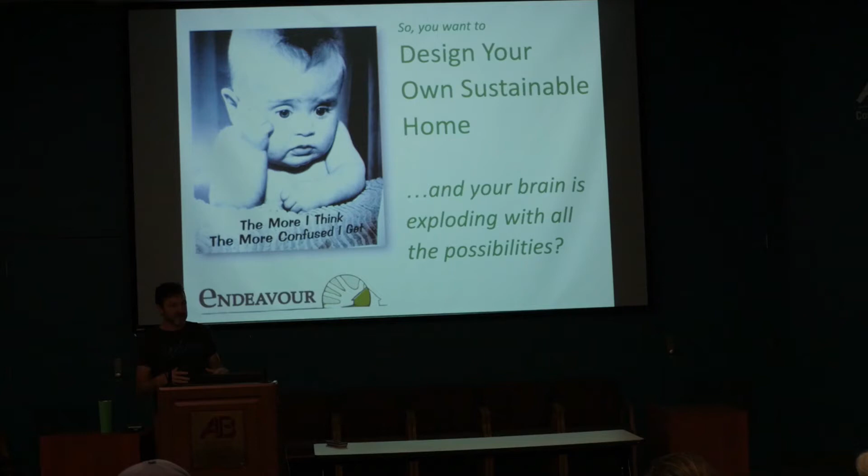This presentation is from Endeavour. We actually do it as a 2-day workshop with a fairly small group, so this is kind of the intro part of it. I'm very used to doing this with a group around a table, not so much as a lecture style thing. But I'm very happy if you have questions as I'm going through—don't hesitate to put your hand up. There's ample discussion time built in, so don't feel like you have to sit on your hands and hold your questions till the end. There's a lot of content here, and if you wait till the end, you might forget things you had to ask earlier on.

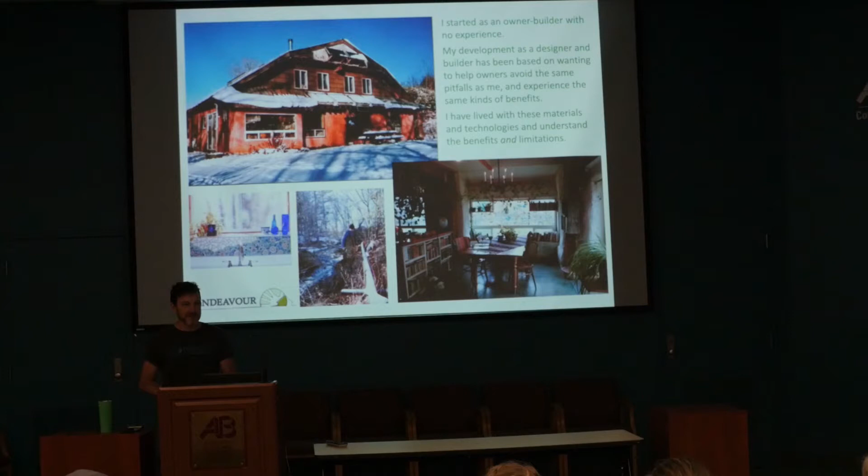I just want to very quickly frame how it is I'm here and what I've been doing. This workshop is really the workshop I wish I'd had when I built my first house, on which I made every mistake that's possible to make—I think I invented other categories of mistakes and then made them too. Since that building I've become a full-time designer, builder, and teacher. The hard lessons learned on that house were a good start, but I'd also love for people to not make those mistakes and probably make other ones, new ones.

Since that first house, which was 25 years ago now, I've been really fortunate to have a pretty exciting career. It's been a fascinating time to be involved in this big umbrella world of sustainable building. I've had a chance to work with a lot of really wonderful people, materials, and systems, and lots of clients who've been open to trying things out and trusting in me and the team of people I work with to do some really interesting and pretty fascinating projects.

I call myself a sustainable building omnivore. I'm not at all attached to or dogmatic about any particular material, system, or approach. My whole approach is very much that we try to design the right building for the right place, using the right materials for that person at that time, and that's rarely a cookie cutter kind of thing. There's often so many ways you could approach a particular building, and through that, at Endeavour we've managed to somewhat systematize not what we build, but how we get to the point where we're ready to build that.

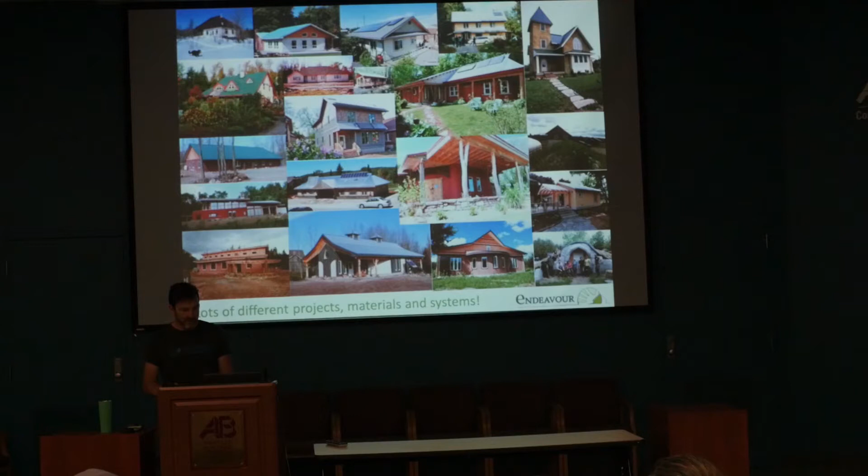Like a lot of people, my move into thinking about alternatives—wanting to at first just build myself a house, but then do it for other people—came from the fact that I didn't like what I saw particularly in the conventional construction world, but I also didn't know what it was about that I didn't like. I kind of just didn't like it, and thought that there were probably ways to do something better.

Because I work with a lot of professionals on both the design and building side who make their living doing conventional construction, I realized I wasn't dealing with an evil conspiracy of terrible people determined to do bad things to the planet and to people in buildings. What I realized is that this is a really smart group of dedicated people who have set out to achieve certain goals with the buildings they're building, and that just some of my goals weren't reflected in their list of priorities. The priorities of the mainstream building world are to meet minimum code standards at the very least, and to put things out at a cost that the market will bear.

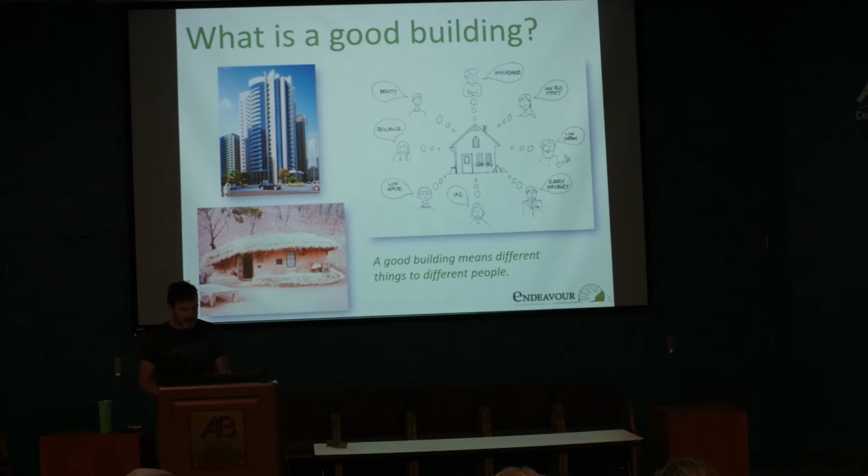But really as a designer, that's what I'm asking my client. I'm asking them, what is it that you actually want? And it can't be so general that I can't act on it. So I need to know what it is that they really, really want.

And so in asking that question to a lot of people over a lot of time, and in thinking about the answers we get, we've been able to lump together categories of concern that people have. So when they come to us and they want something, whether they call it green or natural or sustainable or whatever adjective is describing it, what we realize is that underneath the surface there are a bunch of considerations, and not everybody's concerned with all of them, but we now like to put all of these things on the table and have people think about it and react to it, and then tell us how they feel about each of these.

So they're in no particular order, not in any order of importance, but these are sort of, I think there's 10 or 11 categories of criteria that we see as being individual pieces of a sustainable building. So this first one is ecosystem impacts, and this was a big motivator for me in my first project, and continues to be.

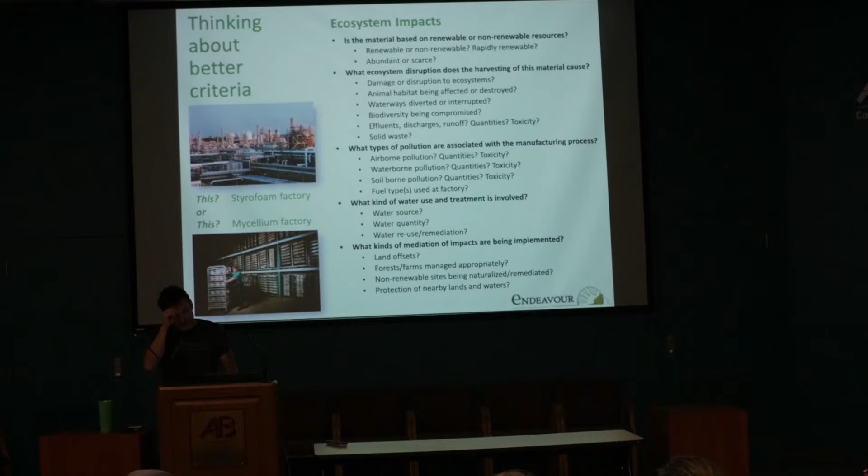The other picture is of a mycelium factory in New York State, where they literally grow an insulation. They take a bunch of chopped up agricultural waste, put in the spores they've developed, and grow an insulation. These two products have the same R value and a lot of the same properties, yet one has basically no ecosystem impacts, and the other has a lot. So if this category of ecosystem impacts is important to you, you'd want to be making choices along those lines.

Somewhat tied to that, and for the people who were here earlier this morning this is a bit of a repeat, another criteria that is really first and foremost on my mind these days is the embodied carbon, which comes from the process of harvesting and manufacturing materials. There are all kinds of emissions associated with that work, and some materials will have a really big carbon footprint in the material itself, while others will have a lot less.

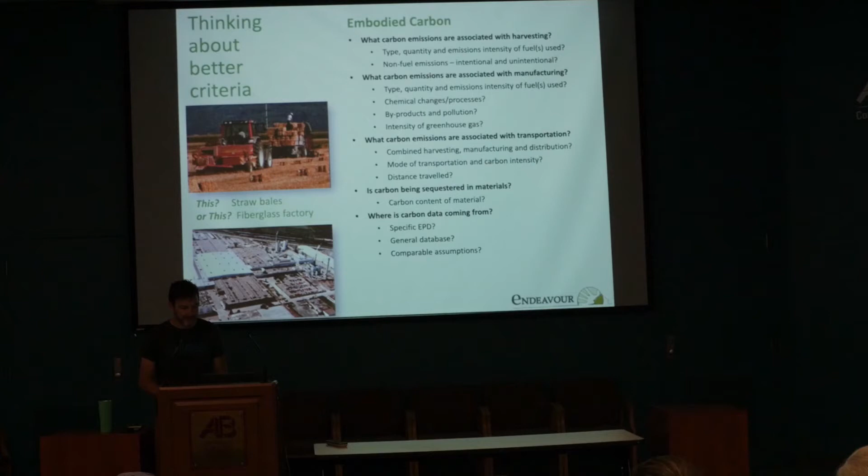So a similar sort of list of questions: wanting to know the actual quantities of emissions, where they come from, what fuels are causing them, whether some emissions might be from chemical releases during the process, other emissions from byproducts or side effects of the process, and also emissions from moving the materials around. The further you transport things, the more emissions are associated.

On the flip side, some materials actually store a bunch of carbon. Plant-based materials are carbon storing. And very important to this is how you are determining those emissions, and how you're getting your figures for where that comes from.

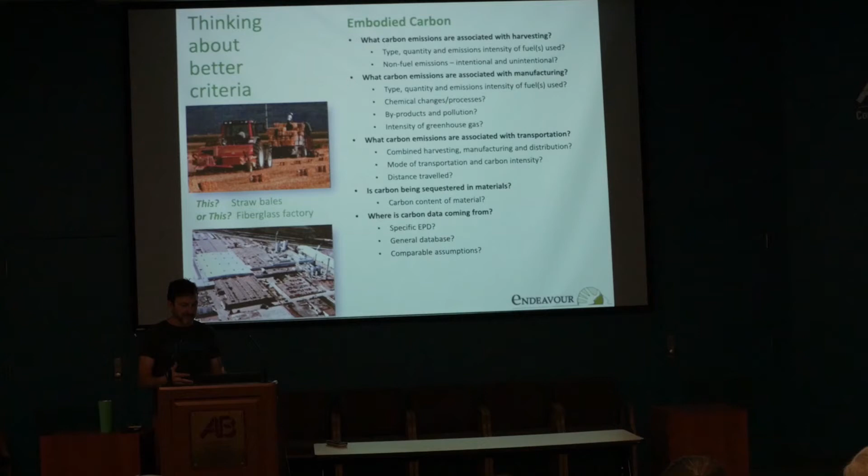So again, a comparative exercise. I do a lot of work with straw bales, and the embodied carbon of making a straw bale is really low—basically just the fuel it takes to drive the tractor around the field and bundle up the straw. Compare that to a fiberglass factory, where they have to burn enough fuel to heat the glass till it's molten so they can spin it like cotton candy into fibers. So again, two materials with very similar performance in the building will have really radically different carbon footprints.

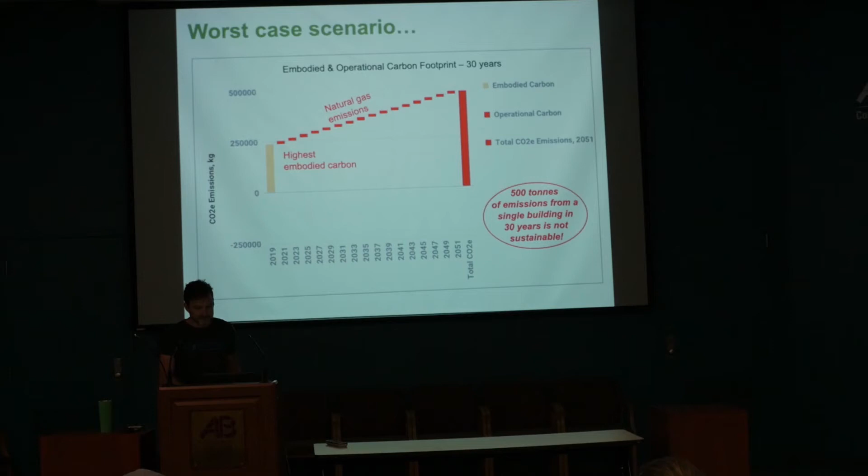I think I'll skip that, because we'll talk about energy efficiency. I might come back to you, Chris—you have another question?

Oh yeah, sorry. If you live in an area that has high rainfall, when you're building, do you lean more towards materials that would go up more quickly, and then you can increase it, or does it really matter?

It wouldn't. All of these criteria we're going to go through would rank higher to me than how much it rains in that particular area as a reason for choosing a particular material or approach, because there would be ways to use all kinds. We already use all kinds of materials in conventional building that can't get rained on, like fiberglass insulation—it doesn't work when it's wet either. So you build to ensure that doesn't happen.

So I wouldn't say choose foam insulation just because it can get wet, if it didn't match all my other criteria. I would say, here's the things I want to meet, then how do I build to make that possible—so that wouldn't be a main guiding principle.

Energy efficiency is something I've spent my whole career thinking a lot about and trying to make really energy efficient buildings. In some ways this is a great criterion to deal with, because it's easy to put numbers to, and easy to figure out how you're doing. With energy efficiency you can actually set a numerical target for a building.

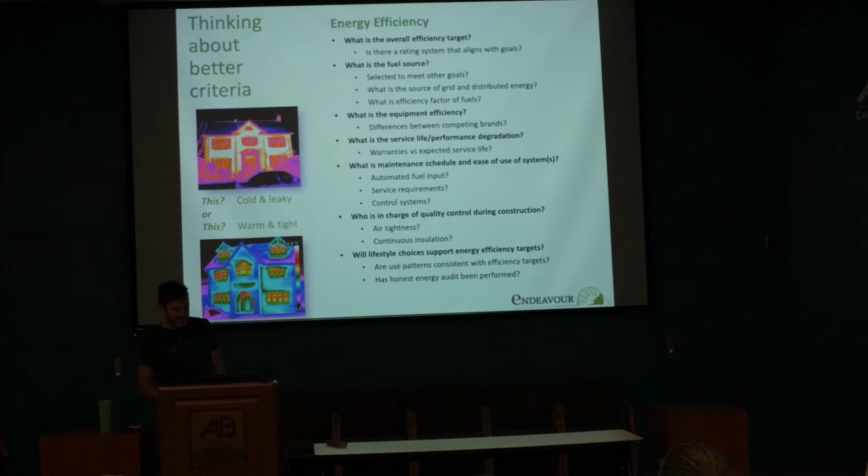So is that an energy efficient building? Well, we made a box that is, but in the end, that owner's lifestyle just didn't match that. So that's an important consideration too.

So for us to think about meeting these energy efficiency targets, we do a lot of energy modeling on our projects, and I really think this is something I'd encourage everybody to think about and engage with as you do this.

We use the Passive House modeling software, the PHPP package, but we very rarely build Passive House certified buildings. I just think the software is really good. It seems extremely accurate and really lets us fine-tune a building. That fine-tuning is what really happens during this energy modeling, which allows us to take an energy efficiency target and figure out the most cost-effective way to get there.

There's lots of rules of thumb, like you just put in really good windows, or double the insulation in the attic, things you think will give you a certain result. But the nice thing about a good energy model is that it actually gives you the result, and you can play with that. You can say, what's the difference if I move from double pane to triple pane windows? From the model I can see the improved performance, and ask does that improvement justify the cost, or would we be better off increasing attic insulation, improving the foundation, or improving our passive solar aspect? We can play with the data until we've met the energy target in the most practical and affordable way.

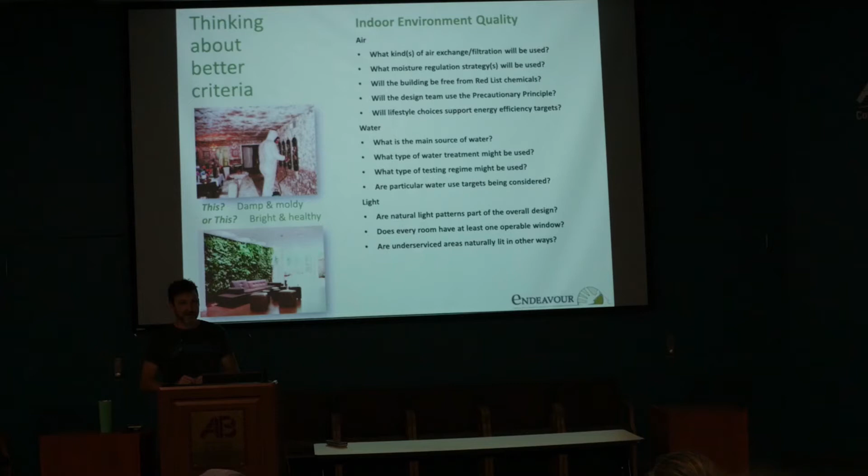In Canada, there are only two things I can't legally put in a building: lead and asbestos. That's it. There are no further regulations anywhere in our codes, I could offer arsenic countertops.

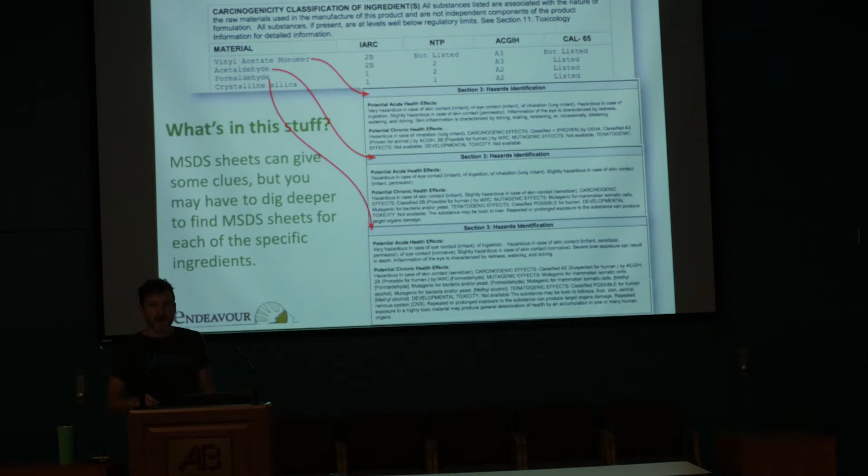Another interesting thing from the EPA: every two years they put out a list of the top 20 environmental things that cause harm to humans. Smoking is always number one or two, and there's a bunch of things. Being inside a building has never been less than number 5 on the EPA's list of environmental harms to Americans. That tells you something about the stuff that's in all the things we surround ourselves with, that just being in a building makes the top 5 environmental problems for humans according to the EPA.

Okay, so waste is a category that not a lot of people go into a building project thinking, oh, I really want to make sure this is a low waste project, but it's incredible how much you can vary the amount of waste by making choices up front.

So a typical North American 2,000 square foot home sends 8,000 pounds to the landfill - that's how much comes off the construction site. We did a house in 2017 where we sent 18 pounds to landfill. So there's a range there, but the 18 pounds comes from thinking about this as a criteria and choosing things right from the get-go that we know aren't going to generate a lot of waste.

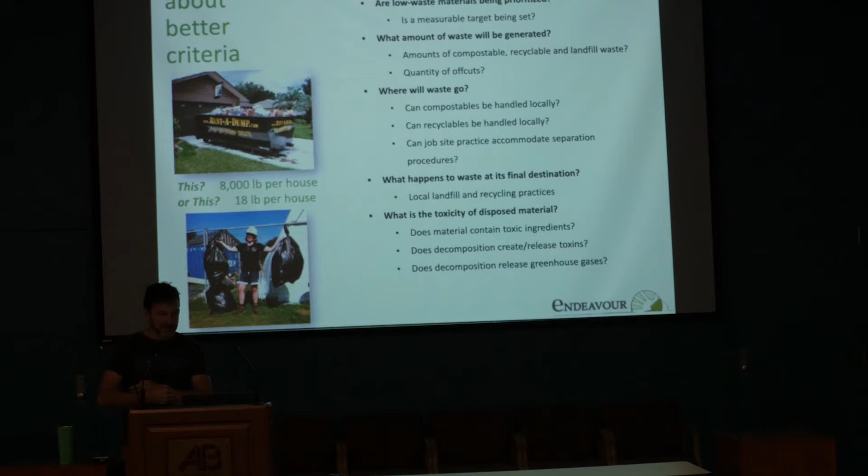The first step in that is setting targets, and some of the building rating systems like LEED and the Living Building Challenge have 50% reductions, 80% reductions, whatever. You can choose some targets for waste reduction.

Then thinking a lot about where does all this stuff go? Some of it is just a matter of sorting. A lot of that 8,000 pounds of landfill could have gone other places, but the typical thing on a job site is to have one bin and everything goes in that bin. Whereas if the cardboard had come out and gone to recycling, and the metals had gone to recycling, and the drywall had gone to recycling, they might have had much less waste.

So kind of knowing the materials you're buying - are they compostable? Are they recyclable? Do they go to landfill? If they're recyclable, is anybody actually recycling them? Because that happens quite often - you buy a product that in theory can be recycled, but you've got it on your site and you realize, oh yeah, nobody's going to take this, so I am going to send it to landfill.

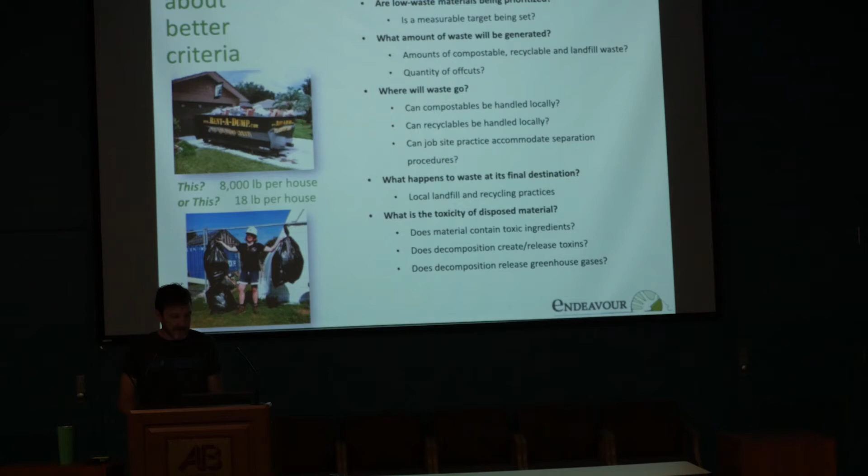So yeah, a whole bunch of things that you can think about in terms of waste. And a lot of that waste then becomes greenhouse gas emissions from landfills, so there's a climate piece to trying to reduce that as well.

Resilience is a category that we didn't really have on our criteria list. I think we started adding it about 5 years ago, and we realized that people were actually starting to really think about this, with extreme weather events happening more frequently.

So we kind of ask clients, like, if you're thinking about resilience, what do you mean by that? Are you looking to be able to be comfortable through a 24-hour power outage? Are you looking to be comfortable if things get disrupted for a week, a month, a year? Are you thinking about the zombie apocalypse? Do you want this to be a forever kind of resilience? Obviously, the design responses to those would be quite different.

But knowing what the client wants is the first step, and then assessing what the risks are where that building is being built. Is it floods? Is it storms? How far away is it? Heavy snowfalls? What are the potential threats? What kinds of disruptions could happen, around say fires, and how close are you to a fire service or a fire station? Those kinds of things.

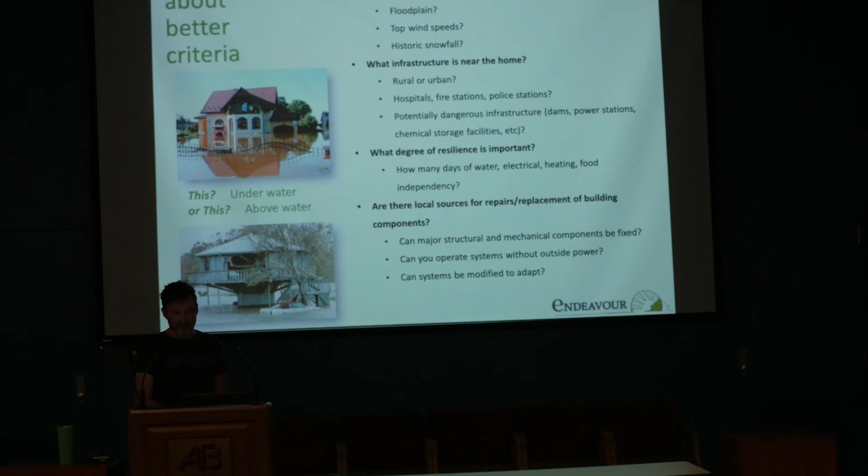For us to think about resilience also means to think about can this building be repaired or maintained or made functional again with locally obtainable resources. It's great to have a high efficiency German air exchange system with a heat pump built into it, but after the hurricane, there aren't very many service people for high performance German heat pumps, so that thing that was great in this condition is now basically useless in that one. So if somebody's really thinking about resilience, it's also are these systems and materials that can be made to keep working if conditions are bad.

The Resilient Design Institute has a really great website for information for resilience-related things. But these are sort of their guiding principles, and at the very least, even if the client isn't saying this is a big driver for them, these are things that I think are important, and we would try to think about anytime we're building anything.

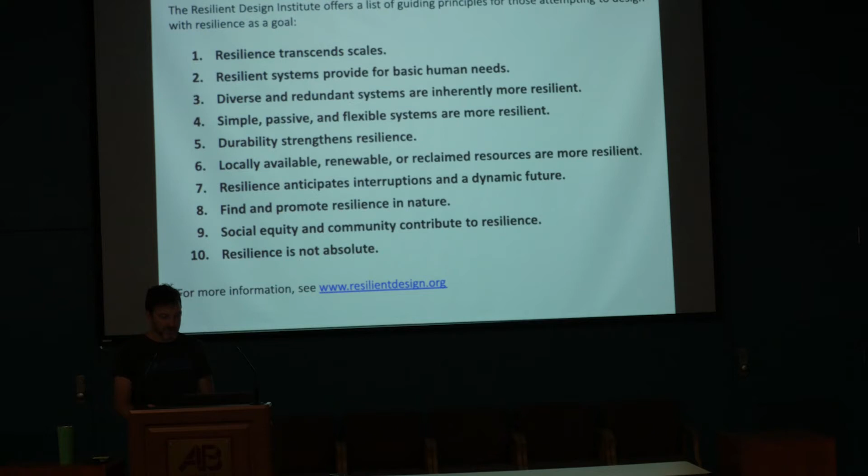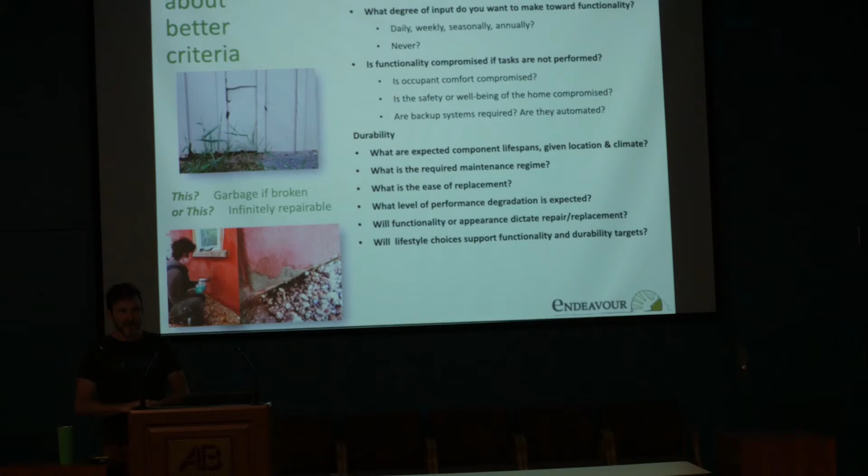Maintenance and durability is another criteria that we spend quite a bit of time trying to tease out what a particular client sees in these categories. They're kind of different in my mind. By maintenance, I'm talking about the things that need to happen to the building to keep it functional, and durability would be the expected lifespan of the materials and systems that are going in.

So, an example would be the difference between, say, a wood stove and a gas furnace. Both of them will heat a house. A wood stove requires somebody to light that fire, maintain that fire, and clean out that firebox on at least a daily basis, actually several times a day, to keep the fire going, versus a gas furnace where the thermostat clicks it on, the thermostat clicks it off, the gas arrives, and the homeowner has nothing to do with it.

And I think there are lots of ways to make really good, low impact and high performance systems that if the owner is willing to be involved, you can lower the costs of those things. And if the owner doesn't want any involvement, then often the cost will go up.

An example being ventilation. You can have an automatic ventilation system that is reading the moisture content of the air or the CO2 content of the air and turning itself on and off and keeping really good indoor air quality. Or you have windows that open and close. But if the owner is not going and opening and closing those windows, then the CO2 is staying in the building and the moisture is staying in the building. So while the windows could be doing the job, the owner has to make sure that they actually do the job.

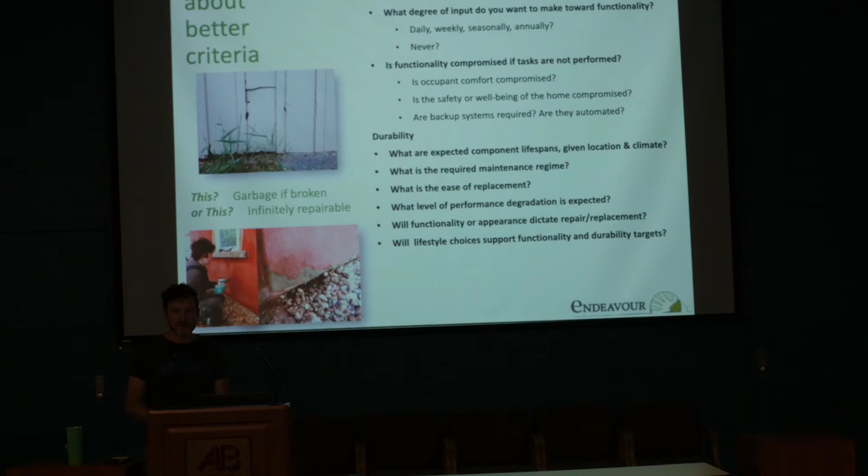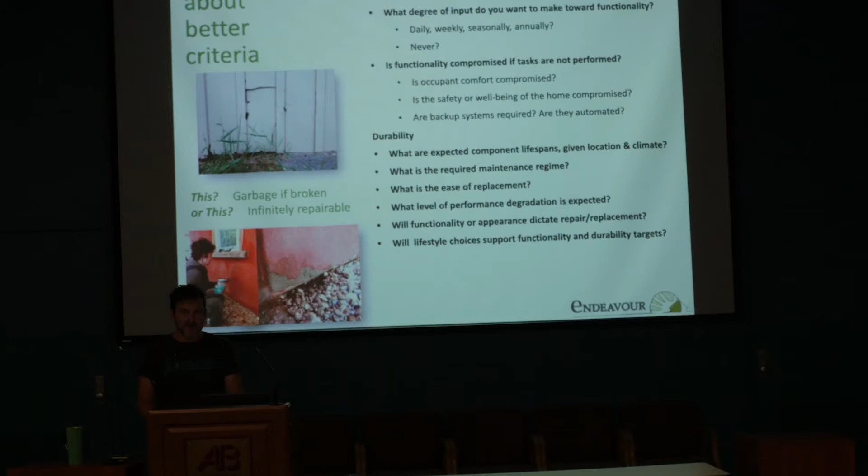One of the examples I like to use to illustrate different approaches to this is vinyl siding in one photo, and clay plaster in the other. In terms of durability, most people would think vinyl siding is more durable, and it's kind of true up until the point. Vinyl siding is one of those things that's durable until it's not. In this case, somebody backed into it, but at some point it just weakens and fails. The clay plaster, people think, especially where I live, it's cold, it's snowy, it's rainy, it's all these things. Oh, clay plaster, that's not a very durable choice. Well, I did my mom's house 15 years ago, and after 15 years, you can see that the little corner had eroded a little bit.

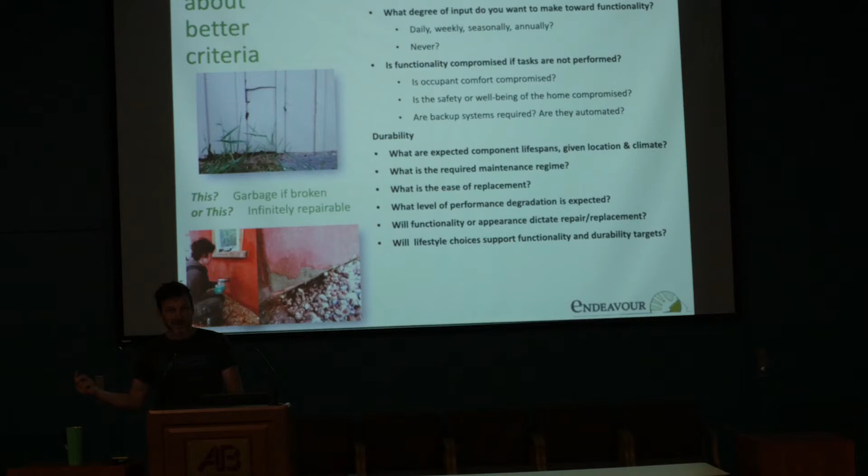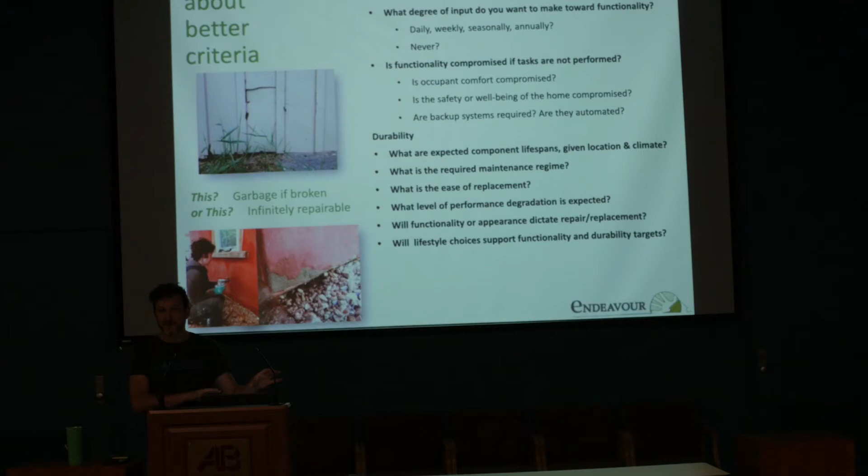So I took some of the same clay that we used the first time, and I wet it, and I wet the wall, and I put the clay back on the wall, and now it looks brand new again. That took maintenance, but it's incredibly durable. We could keep doing that for the next 200 years, 300 years. The vinyl siding is durable, and then it's garbage. I'm not making a value judgment in that - that's up for an owner to decide. There are different approaches, and which is the approach you'd like to take to durability.

Cost is always a criteria. Even though I've been doing this for a long time, I have yet to have the client for whom price was no factor at all. So it's always a pretty major driver in all of these considerations.

Because we're often working with lots of different approaches to buildings, our approach to cost is really to think about value rather than the actual dollars. Not meaning that the dollars don't matter, but a lot of it just has to do with size and thinking appropriately for your budget.

Most people could afford expensive materials if the building was smaller. So if through all of these other criteria you've come up with a building that per square foot is more than you were thinking of spending, if you make less building, you can afford that building. So just making sure right off the bat that the building size and the budget match.

Our clients are clear on what are actually their needs versus what are the things that they say they need but really they just want. Not that it's bad to have wants, but to categorize them as wants and to be able to even rank them so that you can lose some of the less needy wants and keep the ones that are really important.

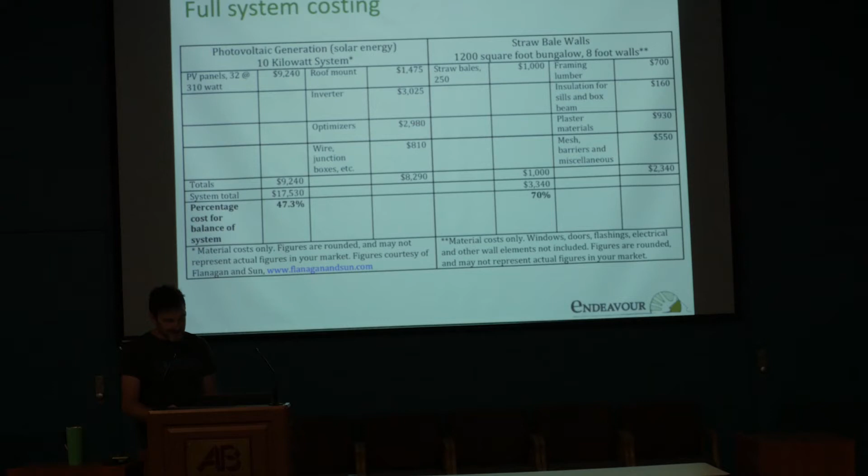And with straw bale walls, same thing. Clients will be like, oh, I only need this many bales, it's this much a bale, my walls are going to cost me this much. But they forgot that there's framing and some other insulation, and that they're going to have to plaster them, and that the plaster requires some mesh and other things, and suddenly they've almost tripled the cost of doing that.

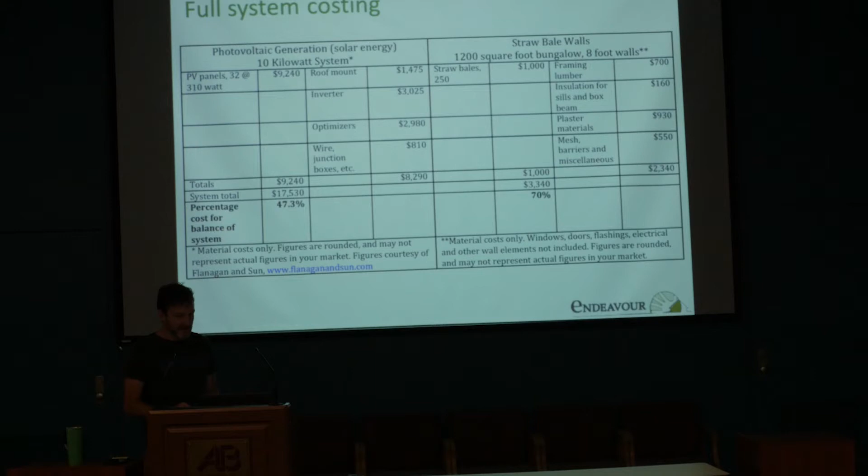So just as a warning to not get yourself into a project without roughing out budgets.

And the labor side of that is sort of like the twin of the cost side, because obviously, for the most part, labor will also have costs associated with it. But also, who's doing the labor is a big question, and that actually will direct a lot of our material and systems choices. If this is an owner trying to do everything by themselves and they're not particularly experienced, that really changes our approach to the design versus if everything's being hired out with really good professionals, different choices will get made because of that.

So who's doing the labor? How is the labor being broken down? Are certain pieces being done by professionals and others being done by the homeowner? Is there good expertise locally?

Balancing labor and material costs. It's not across the board true, but in general, lower cost materials often require more labor, and higher cost materials require less labor.

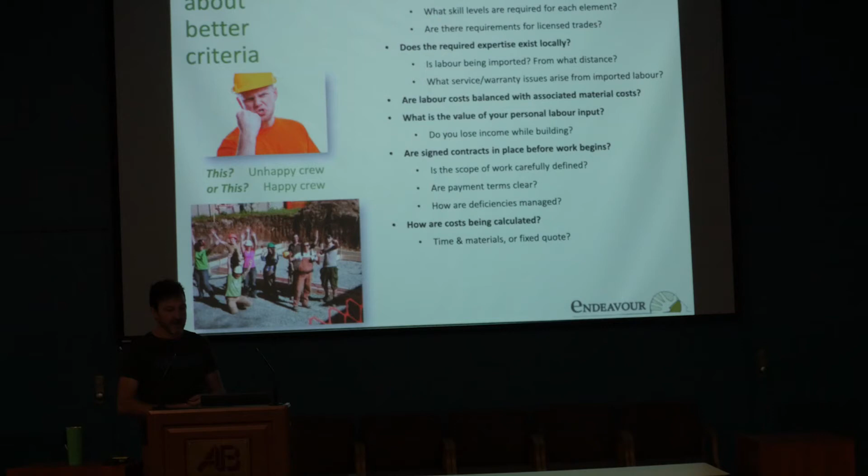If this all falls apart really quickly, if the people you've hired don't care about these things too—guaranteed the plumber, the electrician, the framer, and all those people are going to start whipping out the bottle of PL400 glue and all these other products, even though you're trying to have a non-toxic building. If you've told them that and they don't care, then everything you're aiming for is going to get undermined. So thinking really carefully about who the people are, I think, is really key.

And then, how does all this fit together with the building code, and what degree of code compliance you're wanting to work within is also really important. I don't know how different the codes are between home and here, but here we have basically a prescriptive code. So this great big fat book that's full of do this, do this, do this. And those prescriptions in our code are called the accepted solutions. Those are the things that the code says: if you do this, we're going to give you a permit and approve your work on site.

And then there are things that would fall under the alternative solutions side of the code, which for us means we have to show the building department that what we're suggesting, because it's not a prescription, is the equivalent of the prescriptions, that it meets the minimum requirements, and you have to show them in a way that makes them comfortable to say that it is an equivalent.

So how we approach a building, we've done buildings where pretty much every part has been in alternative compliance, and we've done buildings where it's all accepted solutions, and sometimes it's a mix. It'll be almost all accepted solutions except maybe a wall system or a ventilation system, one component might be alternative solutions. Thinking about the number of alternatives you're putting forward, and how that will go with your code department, is also a really important consideration.

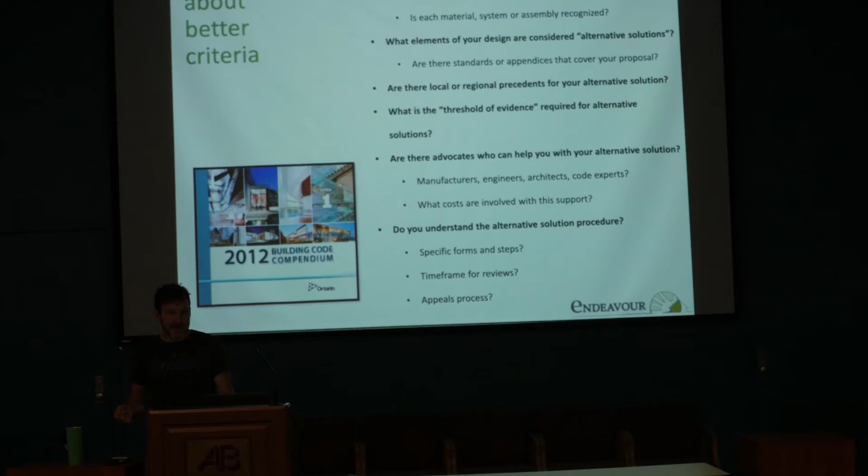So again, there's no right or wrong, but thinking about how that will go, and doing some research - like how long does your building department give you a time frame for turning around an alternative application? Does it cost more to file an alternative application? If your local building department turns it down, is there an appeals process? What does that look like? How long does that take? All of that stuff is good to know, to inform how you might make some of these choices.

And then I think this is the last one, and this is not really a criteria that we try to put any sort of measurement to, because it's kind of impossible to do that. But aesthetics are obviously hugely important for buildings. Owners go into projects with often a very particular aesthetic in mind, and so I'm never trying to guide the aesthetics of a project, but what I try to do is make sure that a client's aesthetics and some of the other choices they've made in these other criteria categories don't have major clashes.

So, if you want to be Passive House certified, but you also have this beautiful lakefront property and you want a giant bank of north windows facing the lake, there's probably a clash there, because it's probably going to be pretty hard to meet Passive House with a giant bank of north windows.

Just simple bylaw things of can you build as high as you want to build, or as wide, or get as close to the property lines. But also things like the passive solar orientation of the building, or the passive solar aspect of it. Do you want large windows on the south side? Is that in conflict with the look?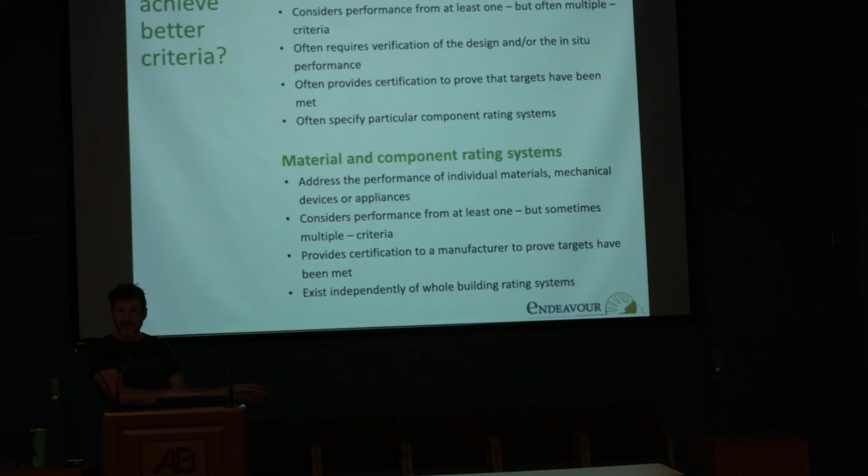Then there are rating systems that are really just about individual materials or components, giving you some sort of eco stamp on a particular material, but not on the whole context. There's a lot of interplay between the two—a lot of whole building systems will specify that all the materials need to be approved by a certain rating system, so they can work hand in hand.

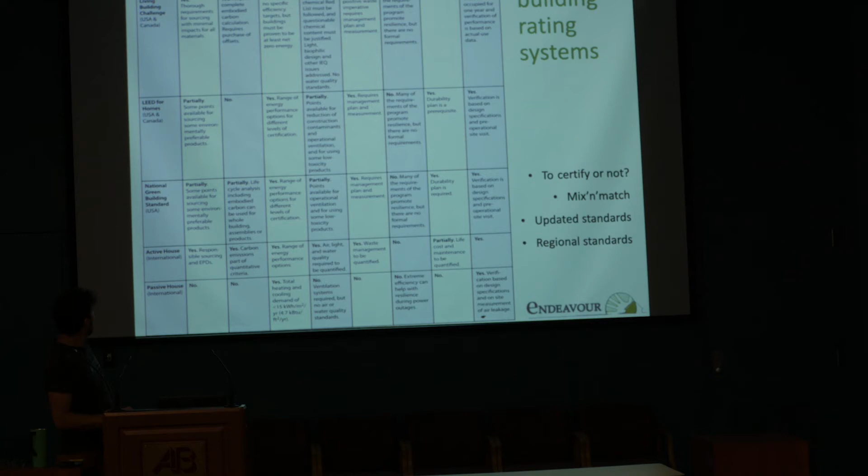So that's not bad for being readable. This is the list of criteria we've just talked about across the top, and a bunch of the whole building rating systems along the side, giving you a sense of which building rating systems actually cover which of these criteria. You can see at the top that the Living Building Challenge hits pretty much all of those targets—they don't do anything on resilience or maintenance, but they hit all the rest.

Various different ones lead. Here in the States, you've got the National Green Building Standard. There's another standard called Active House, Passive House. So they all cover different elements. Quite often, some of these are more just concerned with energy performance and not so much any of the other criteria.

What we often do for our clients is, if somebody doesn't want to go through the whole process of the Living Building Challenge and everything that involves, but they really like the way it talks about three of those criteria categories, then we can just use that part of the Living Building Challenge to do our design and specification from, without using the whole thing. So we might mix and match a few of these things—we might use Passive House energy efficiency requirements and Living Building Challenge's materials petal for clean materials.

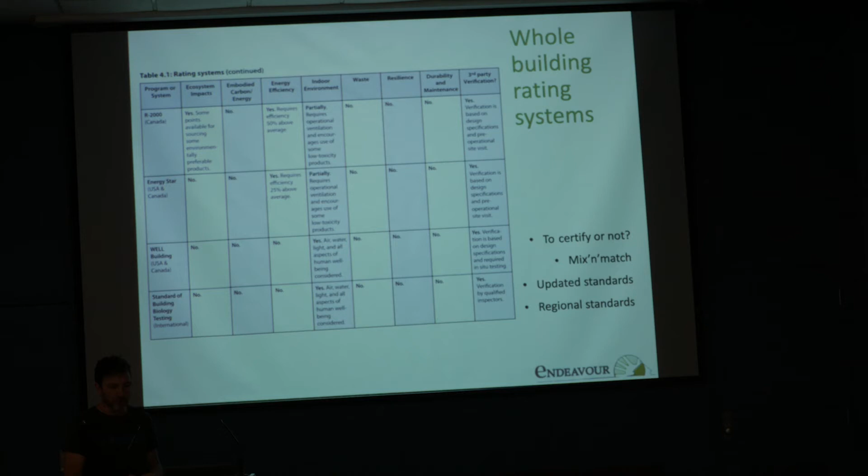So you can pick what you like from various programs. I think every program on this list puts their manuals online for free, so you have access to the core material. Obviously, if you're picking and choosing, you're not going to get certified, but you can use what's been developed. That's just a really good way of guiding you through some of this, because it can be a lot to think about all of these criteria and then just wade out into the world trying to figure out what can I use, what works, how do I know I'm doing a good thing. The rating systems can really help guide some of that effort.

In terms of product or material ratings themselves, there's a lot of different things out there, and unfortunately none of them is very thorough or complete. So all of these are useful to the degree that things are listed with them, but there's nothing that's obligatory. You can look for environmental product declarations, and in probably the entire North American market, there's maybe 120 materials that have done an EPD. So you're going to be able to tell a lot about the products that have been rated, but you're not going to know anything about the ones that haven't.

Same with the Declare program—that's part of the Living Building Challenge. They have this product declaration scheme, and it's useful in that manufacturers have to list every single ingredient in their material and where it was sourced. So that can be really useful information, but again, you're only going to find a fraction of the total product market reflected there.

Material safety data sheets, or SDS sheets, are required to be produced for any material that's sold in a retail environment in North America. So there is one for everything you might buy for your house, but what you'll find in there is somewhat limited because there are lots of loopholes for non-disclosure. If a company declares something to be a proprietary ingredient, they don't have to disclose what's in that proprietary ingredient on an SDS sheet. They just have to say the percentage it represents and that it's proprietary.

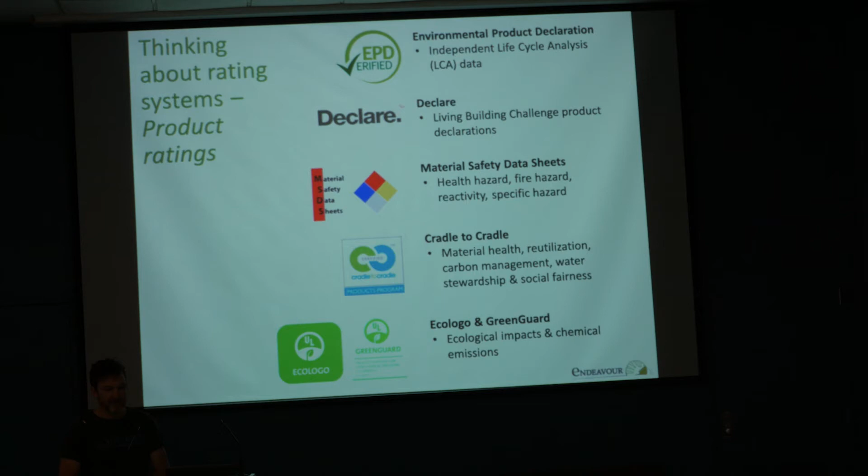And then Ecologo and GreenGuard — those are both programs of Underwriter Laboratories, and they really are just testing to make sure that products meet government standards where government standards exist. So if the EPA said that it's okay to be exposed to X number of grams of formaldehyde, these programs will say this product is either above or below that line, not much more than that.

To further delve into some of this research, I use the Green Spec directory a lot. It used to be free, it's now a subscription-based service. It's not that much, it's like $25 a year, but it's from the editors at Environmental Building News, and they do a pretty good job of weeding out the worst of the worst kind of products and steering people towards good ones. So that's often where I go for a first sweep of a product category. If I see it in Green Spec, I think, okay, these guys have vetted it enough that I will now look into it myself.

The SPOT program at UL is just a free database of everything that Underwriter Laboratories has tested, including — they have an EPD system, so all the things that they have EPDs for, or that their Green Guard program has looked at, are on there.

The FSC is a certification program for wood and wood products, and so, like I was saying earlier in the carbon talk this morning, FSC wood is kind of what you want if you want to make sure that the wood you're using has been sustainably harvested. The whole manufacturing process has been good, and that really good replanting practices are happening in those forests.

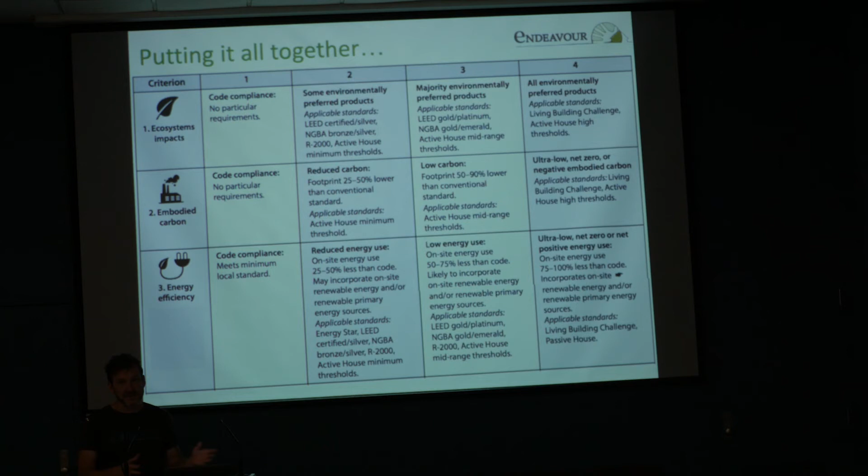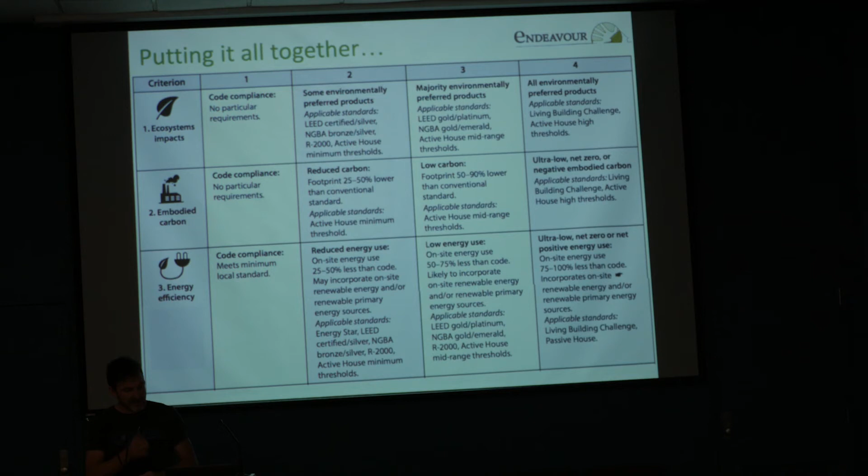You can see that we attach some targets to these. So with embodied carbon, it goes from the client not wanting to think about it at all, to looking for 25 to 50% reductions, or 50 to 90% reductions, or actually trying to make a zero-carbon or carbon-storing building, and so on with all the criteria.

Some of the numbers are really numbers-based, but it's hard to say I got a 100 on my indoor environment. Instead, a number 4 means we really aren't going to put anything in this building that has even questionable chemical content, whereas number 3 means we'll do our best—taking out everything we know is really bad—but if there's one questionable material in a particular paint and that's the paint you want to use, that's fine. And so on across that scale.

With waste, we're either not measuring it, doing a really basic sorting program, or at the far end, trying to divert almost everything and account for all of it.

And then resilience, same thing—there's no sense that a person choosing 1 for resilience is better or worse than choosing 4. It's just different degrees of resilience: what are our target lengths of time for that building to be able to maintain itself if it's cut off from services.

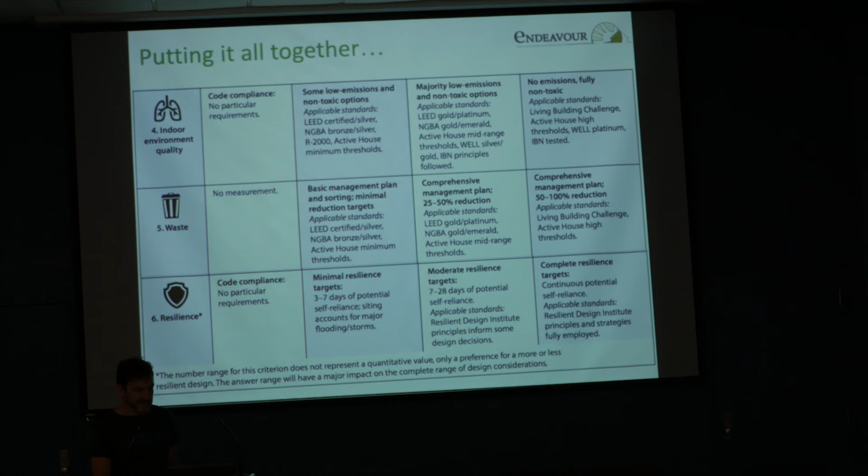Same with the occupant input and durability part—it's not better or worse, it's just how much the client sees themselves being involved in the ongoing operation and maintenance of the building. With code compliance, we go from fully prescriptive to fully alternative, with a couple of stops in the middle.

It was interesting—the first versions of this matrix we actually had things numbered 1 through 5, and then we realized, I don't know if it's a Canadian thing, but people just chose 3. If there was a middle, people chose the middle. So when we took the middle out, people had to think a lot more about which side of middle they wanted to be on.

And same with costs, trying to put a dollars per square foot on there, which is dependent on so many things that it's hard to use a number for that. But those are sort of based on our past history of what things have cost in our part of the world. And then labor, going from fully owner-built to fully contracted, with a few places in between for the owner to have a variety of different roles.

So if that kind of approach is helpful to you, the matrix is open source. It's also in the Sustainable Home Design book that's here. That has been our approach to really how to balance so many different aspects of a building, when people used to come to us and say, yeah, I would like a really green home, and trying to unpack, well, what is that? This has sort of been where we've arrived after a lot of years of basically asking people questions to figure this out, and then we realize that we can start to arrange those thoughts in a more systematic way like this.

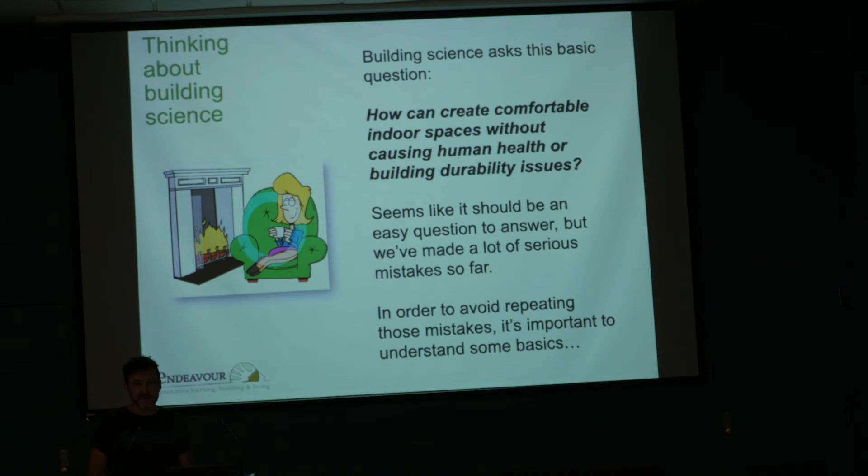Building science, the only thing it's trying to do is answer this question: how can we make comfortable indoor spaces without causing human health or building durability issues? Which seems like it should be a, well, duh, that's really easy kind of thing to do. But it's not, and the whole field of building science is not very old. Really it's arisen because as we've tried to make buildings more comfortable, we've actually caused a whole lot of issues that have been really serious and really bad for buildings and for people in those buildings. So there wasn't building science for a long time.

Lots of these older types of buildings got built with no building scientist involved, and people lived in them, and sometimes people are still living in them, and they're okay. They didn't have major durability issues. And if they had human health issues, it was because they were damn uncomfortable places to live in.

What's changed in buildings is the expectations of the humans in those buildings for a level of comfort. It's pretty much a standard expectation in North America that a building is going to be pretty darn close, within a couple degrees of 70 Fahrenheit, 365 days a year, 24 hours a day, and you're going to achieve that by moving the dial on your thermostat and fine-tuning it, and the building will respond and you will be comfortable. That's not what anybody who lived in any of these older building types expected.

I heard so much about the cave dwellings in New Mexico, and the wonderful passive solar design that the indigenous people sort of used to keep their buildings warm. And I was there in the winter, and it was sunny, and the building was not warm. It made it more tolerable, but it was nothing like what we would consider comfortable. And also, there were ones on the other side of the cliff that were facing north, so nobody ever talks about those in the passive solar lectures.

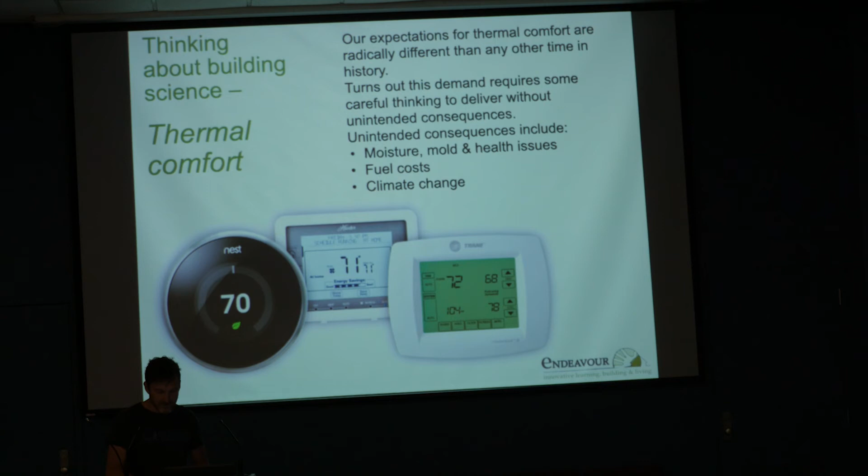So what I want to go through is some of the thinking that's gone into that and how it is that we do that. We do that by thinking about the building in terms of different control layers in the building. We'll go through each of them, and sometimes one layer can be providing more than one of these functions. Essentially we'll go through the 4 layers, but the analogy to clothing, I think, can be really helpful.

So, putting on a sweater is insulation. You put on a knitted sweater, there's a lot of air trapped between all those fibers and strands, and you're pretty warm, unless it's windy, in which case the wind blows through the sweater and you're not warm at all, or unless it's raining, in which case the sweater gets soaked and you get wet and you're not warm either. So a sweater is good insulation, but not good for wind or rain.

A plastic bag is actually pretty good for wind or rain, keeps the rain off, keeps the wind off, but it's not very warm, and if you wear it for too long, you get wet on the inside because you're sweating, and the same plastic that's keeping the water out from the outside is now keeping it in from the inside. So that's a control layer that does some things well and other things not so well.

Sort of the ideal house would be a building that is like wearing a Gore-Tex jacket over a sweater. The Gore-Tex jacket over the sweater, the Gore-Tex is a tight weave, the wind doesn't come through it, most of the liquid water stays out of it. The sweater is keeping you warm, but as you're sweating and transpiring, both the sweater and the Gore-Tex will allow that moisture to transpire out through the fabrics, and you stay both warm and dry and comfortable. So really what building science is trying to do is build the Gore-Tex over the sweater version of a building.

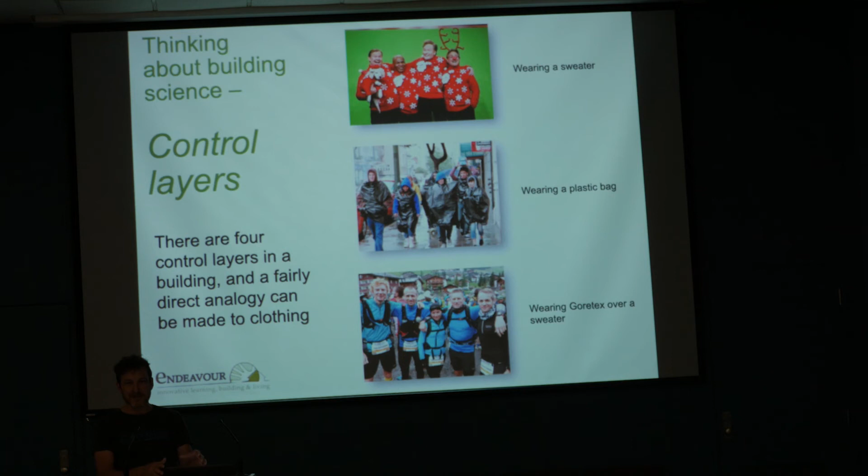So of these control layers, they're in order of importance. The first one is the water control layer, and that's everything on the building that keeps the rain out.

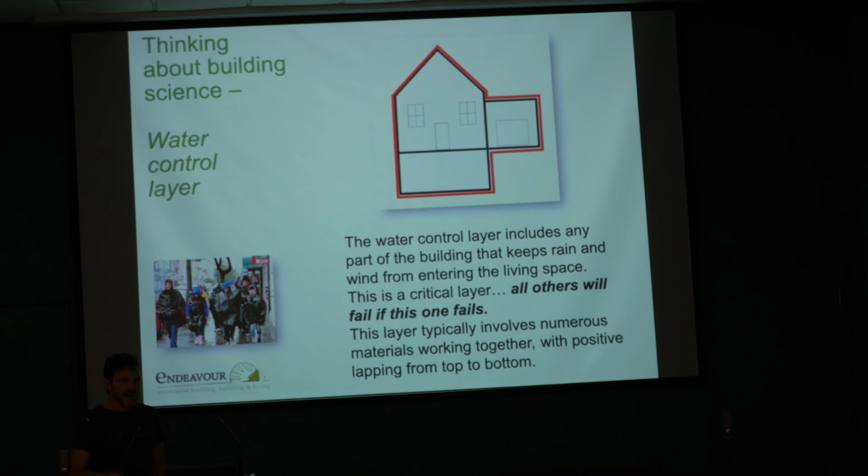Buildings get tricky to have these layers because different groups of materials will make up that layer. You need to keep the rain off the roof, so you have roofing, but you also need to keep it out of the wall, so you have siding, and out of the foundation, so you have a moisture barrier. All those things have to connect and make sure they don't leak at the seams. But this is the layer that trumps all of them, because if you don't get this one right, the rest of them stop mattering.

It doesn't really matter how well your building's insulated. If the insulation is soaked, it's not going to do its job.

There's lots out there about how to keep water out of buildings. It's one of the aspects that the modern construction industry does a pretty good job of. We've developed lots of both techniques and materials to make sure that water sheds out of buildings fine. So I'm not going to go into much depth on this one other than to point out the obvious importance of it. Really, we're keeping out the precipitation, and the groundwater is a really important one to remember.

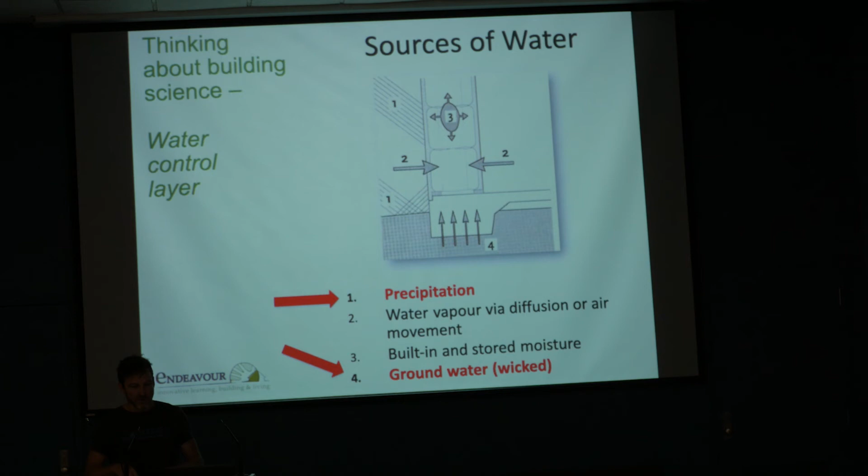Anywhere that your building is in contact with the soil, unless you're in a pretty high dry desert, that soil is always humid and it is always a potential source of water up into the building.

So the thermal control layer is the insulation part of the building. Obviously, you want that everywhere where you're trying to prevent the indoor temperature from becoming the outdoor temperature or vice versa. You'll want it in different thicknesses depending on the temperature difference between inside and outside that you're protecting.

The design temperature for my climate is minus 38 Celsius, so we have to build a building where it's a reasonable expectation that you'll be able to keep heat in the building if it's minus 38 outside.

But where our buildings touch the ground, it's actually only going down to maybe 6 Celsius, so the slab under the building has a much smaller difference in temperature between inside and outside, so we would have less insulation there. The thickness of the insulation, its resistance to the flow of heat, all of those factors get put together to decide how much of the thermal control layer we need at any given point in the building.

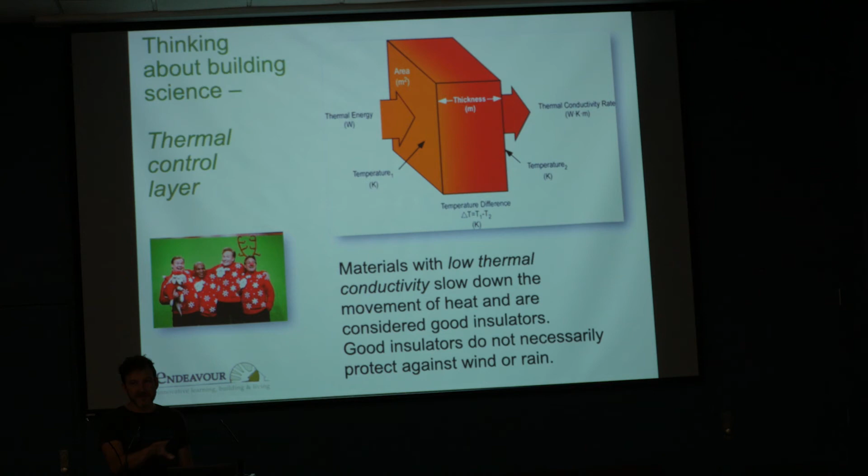But these materials, a lot of them, this is the only thing they do in the building. Most of them are not structural. They're not good at shedding water, so they're one control layer that you then need to protect with the other ones.

It's also good to think about what heat flows that thermal control layer is protecting you from or trying to slow down. The heat in the building and in the universe is moving in 3 different ways.

By conduction, there's actual transfer: my hand's warm, this table's cold, I put my hand on the table, my hand is now trying to warm up the table. Everything in the universe is attempting to equal itself out, so a place of higher concentration of temperature is moved to a place of lower until they're the same temperature.

If this table is made out of stone and it's really, really big, and I put my hand on it, I will keep generating body heat, and that body heat will keep going into that stone for a very long time. I'll be able to transfer a lot of heat by conduction.

If I want to conduct it by radiation, I'm going to hold my hand right here, and I'm going to try to warm up that table, and I will, but it'll take me longer. So radiation is an effective way to move heat. It's how the sun gets all its heat here, but it's the transfer of actual heat radiation. It's not dependent on me touching anything.

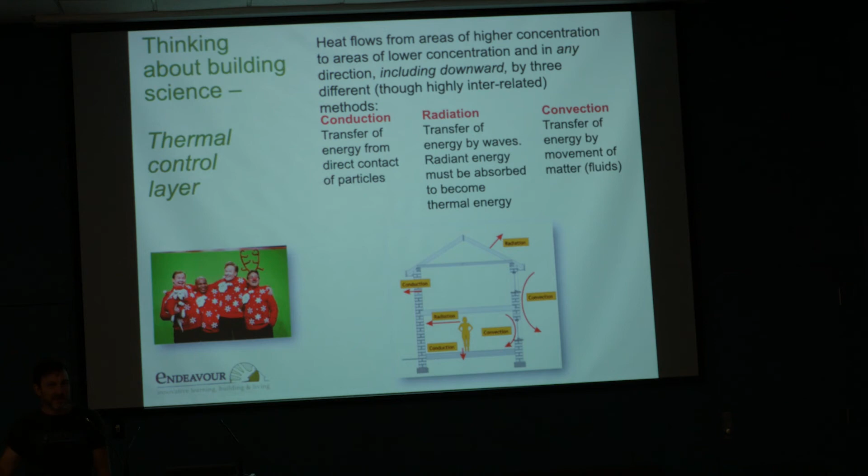So in an uninsulated wall, if you just have a frame wall with drywall or plaster on this side and some kind of cladding on that side with a big empty air pocket, that's a great example of a convection loop. If the home is warm, the air touching the backside of the drywall gets warm and rises quickly, gets to the top, and starts to touch the cold side of the wall, giving off that heat really quickly to the cold siding, then drops to the bottom where it gets warmed up again, effectively moving a lot of heat very quickly by that convection loop. That's going on all the time in our buildings, simultaneously all around.

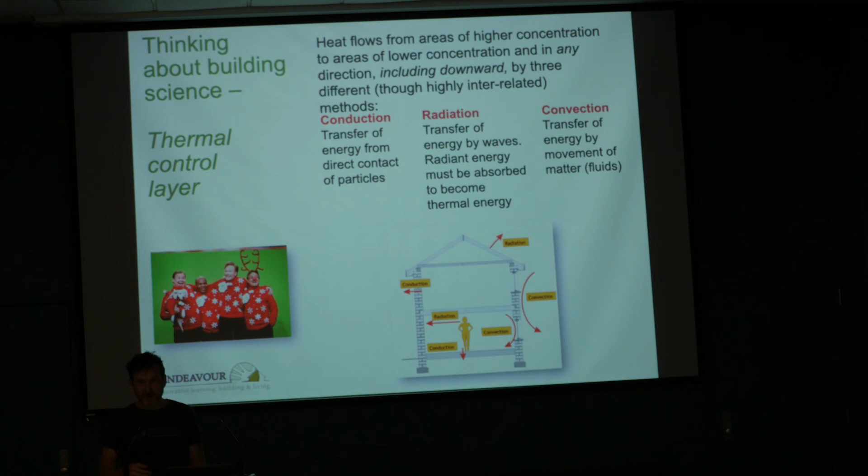So it's important to think about this because there's this notion that heat rises, and that worrying about insulating foundations doesn't matter because heat rises. Well, tell that to your feet that are touching the ground and trying to warm up the whole planet underneath you. That keeps happening constantly in a downward direction. So both conduction and radiation happen in any direction. It's only convection where the heat rises, because it's being moved by a fluid like air or water.

So you've got this layer of insulation, and like we talked about with the sweater, if air can just blow right through that insulation, then the insulation stops insulating while air is moving through it. So the air control layer is there to make sure that the air in your insulation is still air, because still air insulates and moving air does not.

This can be a whole bunch of different things. Sometimes part of the air control layer is the sheathing on the exterior of the house, sometimes it's the sheathing on the interior, it can be both, it could be solid materials. You could be using membranes to do that, so house wrap and vapor barrier and things like that. But essentially, you're trying to limit the movement of air from inside to outside or outside to inside.

And this is kind of controversial, especially in the natural building world. The notion that we should be making our buildings sort of airtight is death to some people. But you can't have an energy efficient building that's not airtight. At a certain point, if there's leakage from inside of the building to the outside or vice versa, that's the path of least resistance for heat movement.

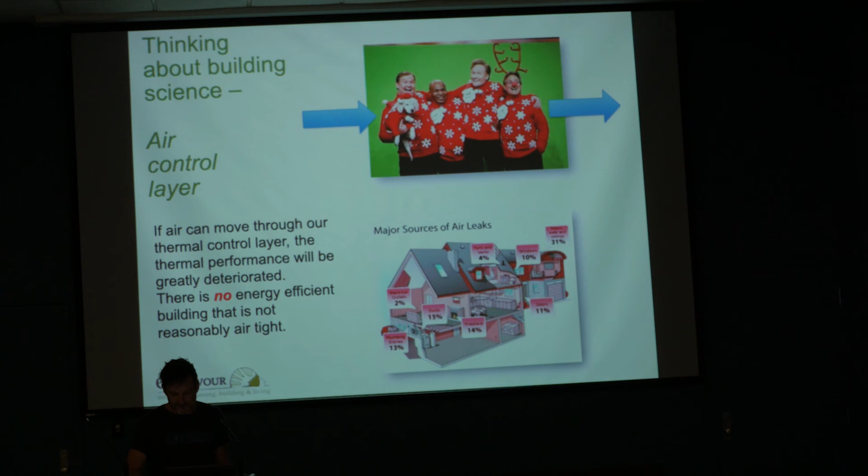So air leakage has major comfort and efficiency implications, but it also has a really critical moisture implication, especially when humidity is extremely different from inside to outside. I'm from a place where it's largely a heating environment, so the inside of our house is warmer and more moist than the outside for a lot of the time, except for July, August, and September, when it's actually warmer and moister outside than it is inside.

So if you have warm, moist air and a way for that warm, moist air to get out to where it's cooler and drier, it will do so at a pretty great rate.

One of the big tests that came out in the building science world quite a while ago, 15 years ago, was this one done in Ottawa, where they measured that a 1-inch square hole in a 4-foot by 8-foot sheet of drywall, in the Ottawa climate where I'm from, would let 30 quarts of water travel through that hole in the space of one heating season. That's like opening up the top of your wall and just dumping 30 quarts of water into the wall - not a good way to improve your building's durability. In fact, it's what's going to probably kill your building.

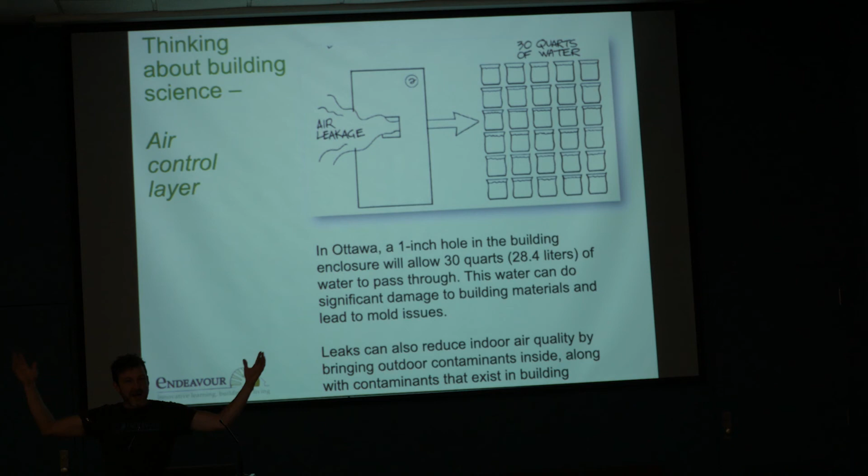If you have a completely uninsulated, completely leaky building, you don't typically have any building science issues because that warm, moist air can disperse. Lots of old houses are like that - it goes out quickly, there's lots of places for it to go out, and where it does leave moisture behind, it can dry out really quickly because the air is moving all the time.

When you start to close a place in, seal it up, and put in insulating materials, you get this kind of scenario where in that one stud bay with that one hole, if you start having 30 quarts of water accumulate in there, and it's in the insulation, and now the insulation's wet, and the sheathing's wet, and the studs are wet - but there's not enough airflow in there because it's full of insulation and not enough holes to get it to the outside - then it's going to rot or mold or start to cause problems.

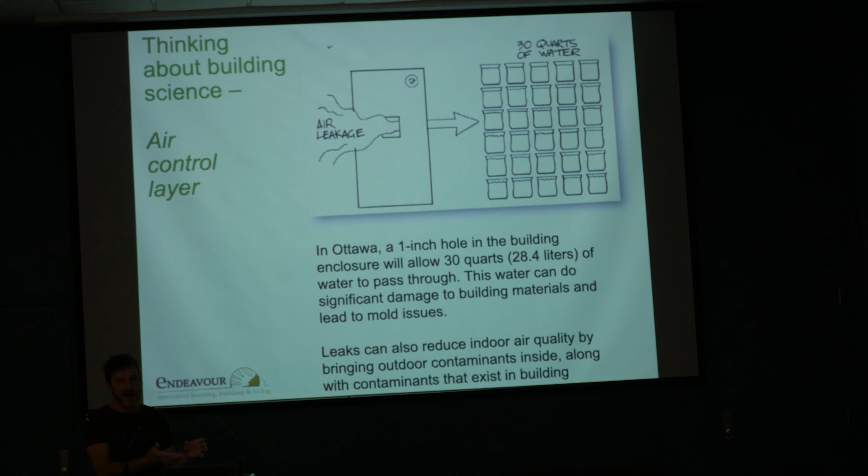So that's the air movement side of things, and most moisture issues in buildings are caused by that - the actual flow of moisture one way or the other through unintentional gaps and holes and leaks in the building.

Vapor pressure operates the same way. The same way that temperature wants to move from a place of higher concentration to lower, so does moisture. If you have a building that is warm and moist inside and it's really dry outside, the same way that heat flow is going to want to try to get out to warm up the outside, the moisture is going to want to go and try to balance out with the drier air outside, or vice versa, depending on the climate.

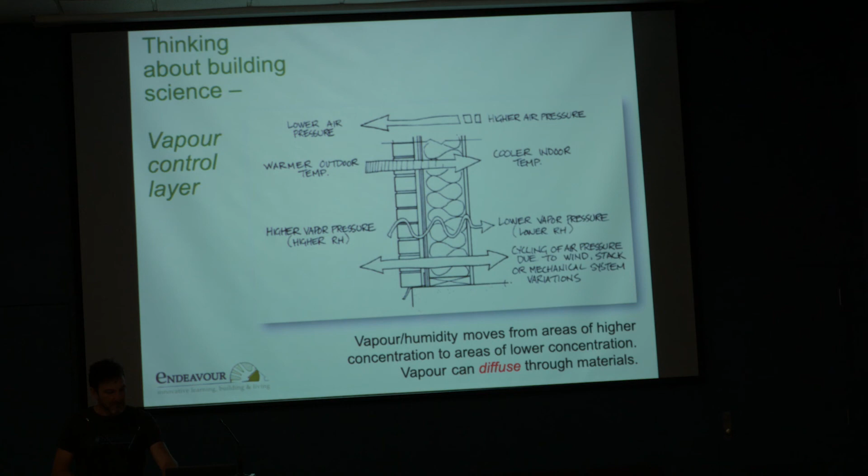And that drive is strong enough that individual water molecules will push their way through building materials, through solid materials, and push and pull and make their way through and pop out the other side. So that movement of vapor happens, but at a much slower rate than when it's traveling on air.

So where we had the 1-inch hole in the sheet of drywall letting 30 quarts of water through, the amount of moisture that's actually going to transpire through that drywall in that same amount of time is 1/3 of a quart. So basically, in building science, you deal with preventing moisture flow by preventing airflow, and beyond that, the whole need for vapor control is much less, because so much less moisture passes through materials by diffusion than it does through air leakage.

So the vapor control layer and the air control layer in a lot of buildings can be one and the same, because if you have something that the air's not going through, then you're preventing the vast majority of the vapor from going through in the first place. And that's why the term came up earlier today again, the notion of breathable walls. I really don't like the term breathable, because to me breathable is this.

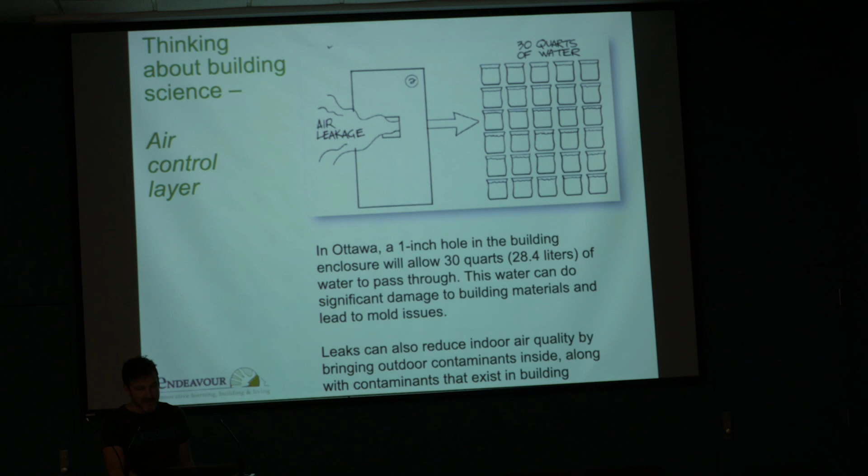When I breathe in, air moves into me, and when I breathe out, air moves out. That's breathing, and that's causing that kind of issue. Whereas in natural building, when people are talking about breathable walls, what they really mean is materials that moisture can transpire through, but they're airtight.

So if I make a straw bale house and plaster it well, the plaster does not let air through. If you want to test if something is an air barrier, cock it to your lips and see if you suffocate—because if you do, it's an air barrier. If air can't pass through it, it's an air barrier, and it does a really good job of controlling moisture. But while you're choking on certain materials, the moisture from your breath will make its way through the material, and there'll be a damp spot on the other side eventually. That's a permeable material, but it's not a breathable material.

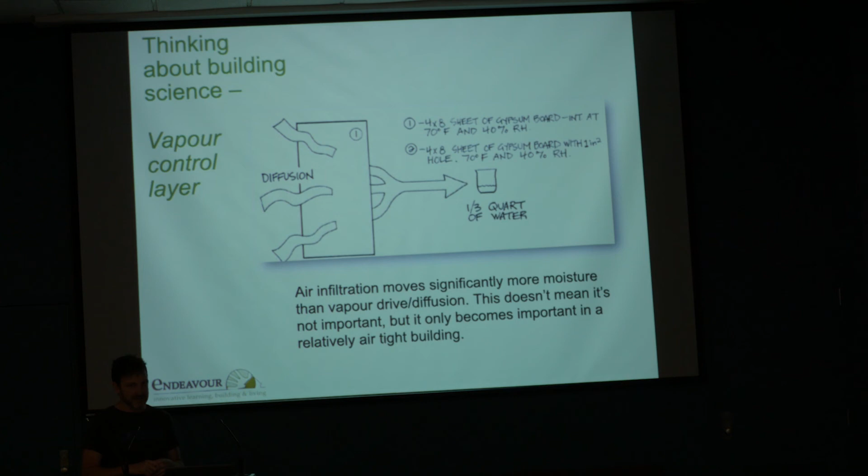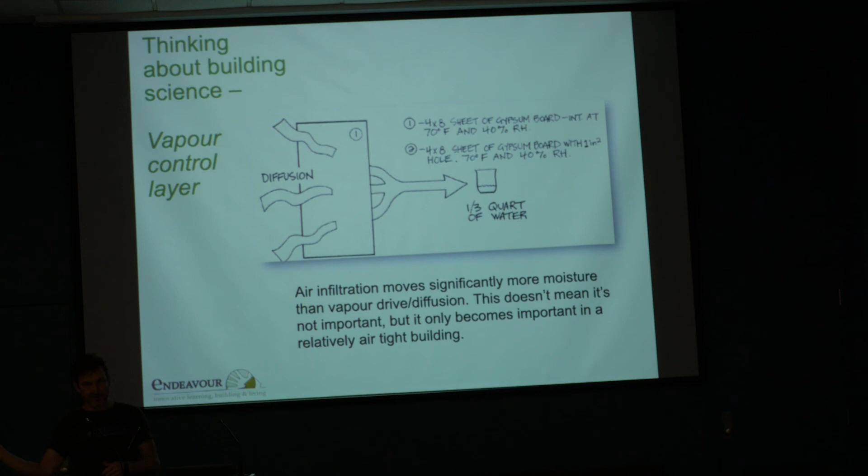So we're actually looking for materials and whole assemblies in buildings that have those qualities. If they can transpire moisture through them, but they stop the flow of air, then that's the ideal from the building science point of view, because that means if they can transpire moisture, when they're too wet, they can dry. Ideally, they could dry to either side of the building, to the inside if that's the dry place, or to the outside if that is.

So the whole idea of designing a good building with building science in mind is based on two things. One is, what's the safe storage capacity for moisture in a particular assembly? So how much moisture can that assembly hold before there's condensation and before it becomes a problem?

And that varies widely. A cubic foot of hempcrete or straw bale can hold about 8 pounds of water in vapor form without any moisture droplets forming. That's because there's lots of cavity space, and because the material itself is able to adsorb a certain amount of water before droplets of liquid water form.

A piece of fiberglass batt insulation can hold almost no moisture before condensation occurs because it's glass. When the material is cold and the air is warm, you're going to get condensation on that material right away. So the safe storage capacity—knowing what that is—is one element, and then knowing what the wetting and drying regime is, is the other side.

Buildings are always going to be getting wet in some way, shape, or form. If it's through a roof leak, you may overwhelm this scenario quite easily. If you can imagine turning on those wetting taps full blast, you might be able to fill that up beyond the safe storage capacity in a matter of minutes or days or weeks.

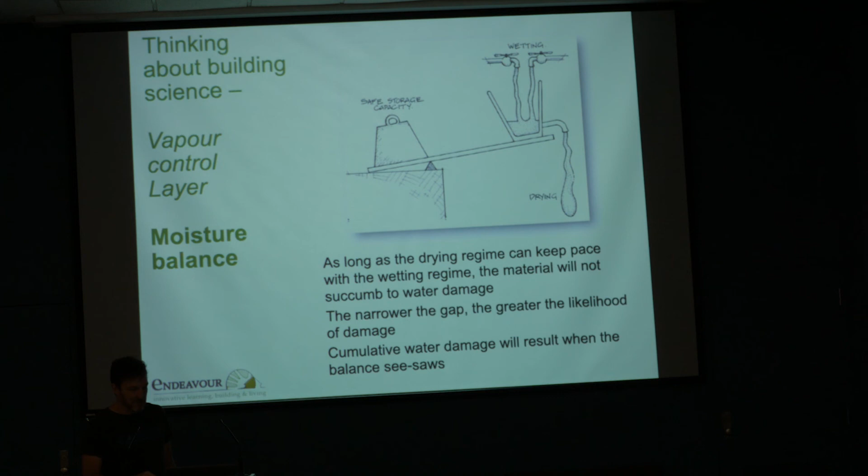That's why I don't like the term air barrier or vapor barrier, because the notion of a barrier isn't a very humble way to think about it. We are attempting to control these forces of nature that are never fully controlled. You can build a building with a million walls and it'll be warm in there, but if you stop putting heat to it, eventually it's going to be the same temperature as outside. There is no barrier, no way to stop it - even a 6 mil plastic vapor barrier, moisture molecules transpire through it. They just do it fairly slowly, but eventually they'd all get out and balance with the outside. So I like the notion of a control layer, because it's us attempting to control something that can't be controlled, aiming for a certain result while being humble about the fact that we aren't in control.

In the entire building enclosure, you want to understand how all 4 of those layers work, where they are, and really importantly, what happens when different materials intersect to maintain the same layer. So what happens, say, in the thermal control layer at the top of a wall where it meets the roof - is that insulation continuous, or is there an interruption in it? If there's an interruption, that's a weakness in the control layer and you'll lose heat there. What happens when your air control layer on the wall meets the floor? How do you make sure that's a continuous air control layer?

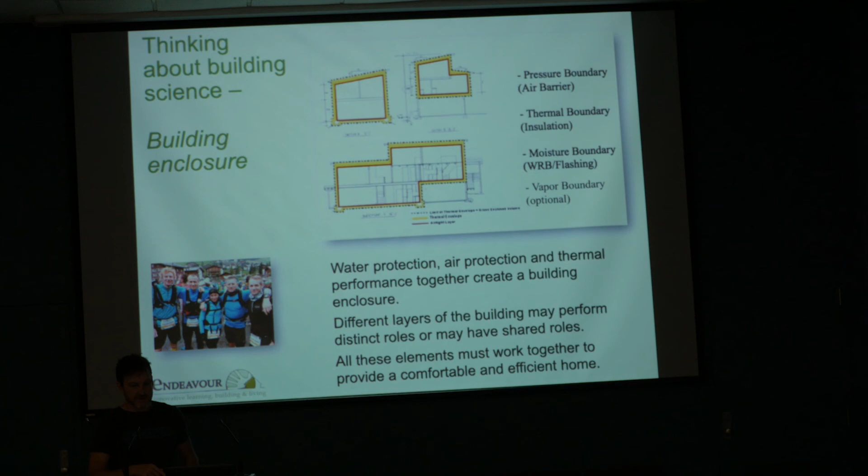The building science world talks about being able to trace your finger around that on the drawings and not lift it, which is a good concept - but you also need to make sure you're not skipping over where a window is in the drawing, because that's where things get tricky. All these control layers are easy where there's a whole area of them, and get really tricky where they meet. So when walls meet windows, roofs meet walls, walls meet foundations - all those places are where keeping things consistent and uninterrupted is difficult but extremely important.

I also want to talk really quickly about thermal mass and passive solar, because I find there are often some misconceptions around both. Thermal mass is about the dynamics of heat flow, but it's not about energy generation. There's sometimes a notion that a building with a lot of thermal mass is a more energy efficient building, and that's not really true. It's just that the dynamics of how energy flows in that building are different. It can have comfort outcomes, but it's not more efficient.

My way of trying to illustrate this is with a tent analogy. If you've ever stayed in a tent, you know that in the morning, if your tent is in the sun and the sun comes out, it gets very hot in there very quickly. That's because the only thing the sun has to deposit its heat into is the air in the tent and you, and neither of you are very big, so the temperature goes up fast. The same thing happens at night - as soon as it cools down outside, the temperature in the tent drops really quickly, because there's not much heat actually contained in that air. So even though it might feel sweltering, the actual amount of heat in the air is pretty small and it disperses really quickly. You get these temperature swings from cold to hot and cold to hot.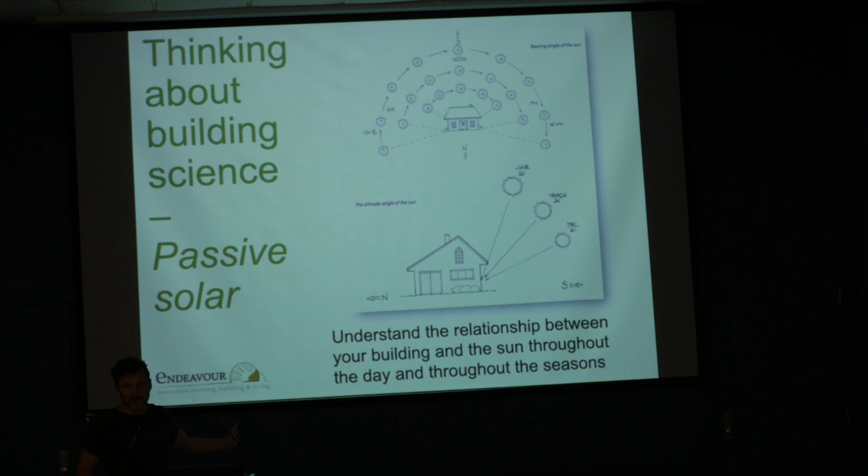This sketch is done for my latitude, about 44 degrees. The sun is quite high in the sky on June 21st and quite low on December 21st. On June 21st it's also rising so that the north of the house sees sunlight in the morning and at the end of the day.

As the season changes, the sun starts to come more just onto the south face of the building. So you take those two things into account to know where the sun is going to be. If this were your site plan, you'd also want to put in land contours, trees, and other buildings that might block the sun at certain times.

With the actual building shape and orientation, I get frustrated with passive solar books that lay out this classic building: long and skinny on its east-west axis with a big long south-facing exposure. It can work, but as you make that south exposure really long, you're also making an equally long north exposure. In a really cold climate, having that much north wall that never sees sun in winter doesn't make up for the added gains from more glazing on the south.

It can work, but almost any house shape can be effective with passive solar. We do a lot of square-ish buildings because if you point the corner of the building south, it gets sun exposure on all four sides all year long. Round houses work great, L-shaped houses too.

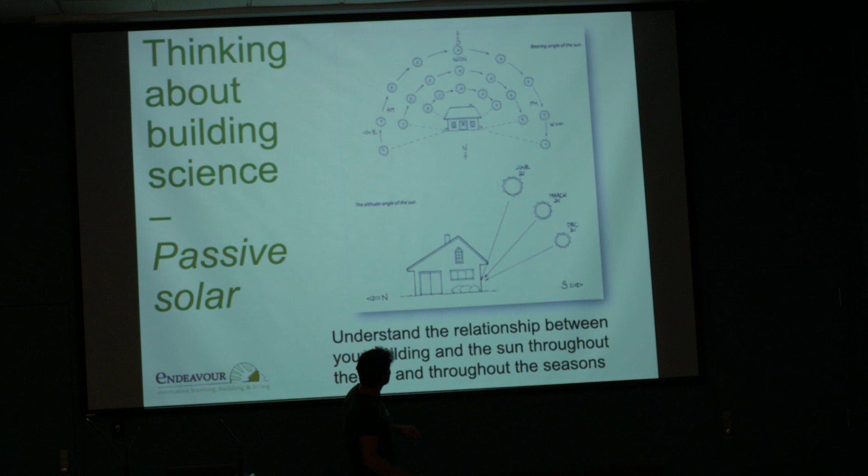So would clearstory windows be a good option on the west? It depends. If your whole clearstory is facing west, it would be hard to shade them unless your roof either overhung or draped back down. You just want to map it out and see how much it's going to get at different times. But what's really important is to remember that on March 21, look at how high it is in the sky as it comes around to the west.

So east overheating doesn't tend to be a problem because the day is cooler, the building's not in danger of overheating, so you can actually have some pretty big east windows and not overheat much, but the west is always kind of hard to control. Okay, so where are we at?

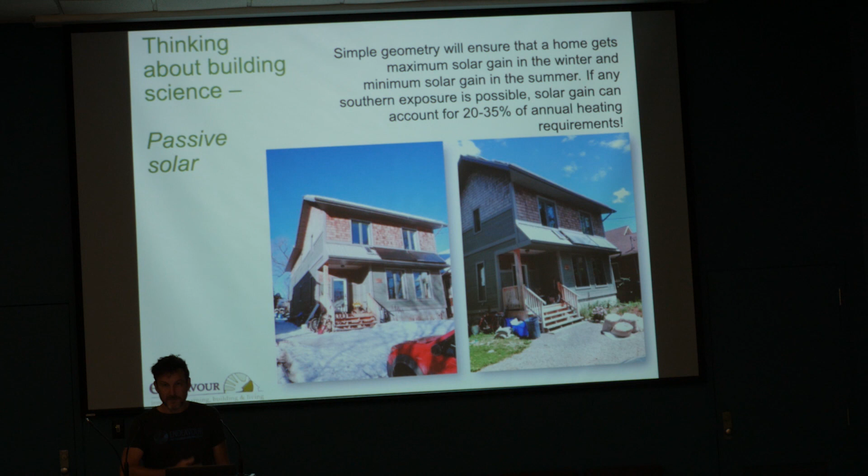Okay, well, I had one more thing I was going to show you, but I'm also happy to just stop and take questions if everybody's brains are getting tired of listening to one person blab for a long time.

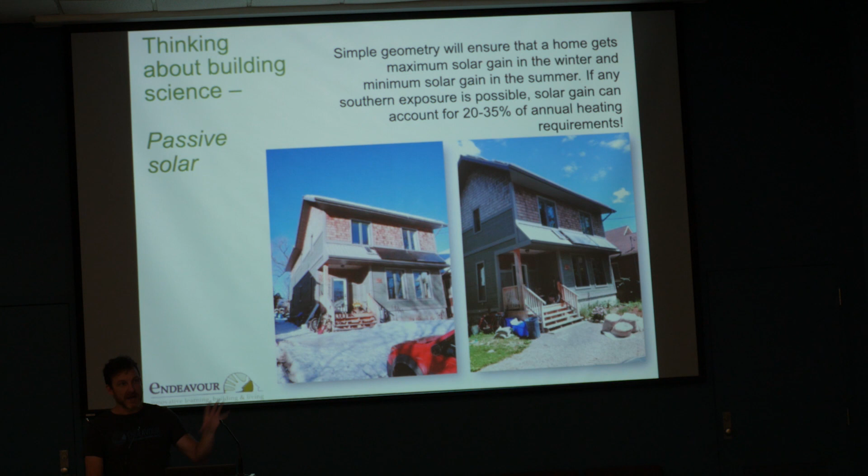What is it that you're going to cover? What I was going to do - I have an actual criteria matrix from two different buildings, and I was going to show you how two buildings turned out to be very different based on how the owners approach that criteria matrix.

Sounds good to me, but if someone wants to leave, I'll stay. Okay, well, just give me a sec, I'll have to pull these slides up.

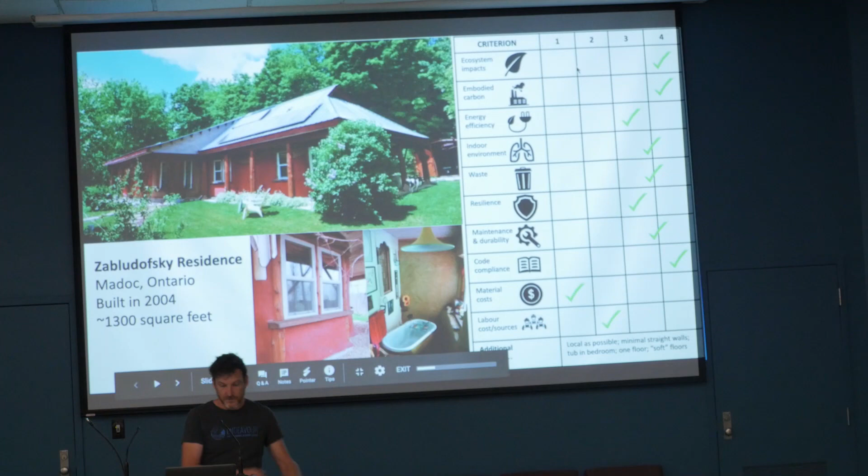Okay, so these are just some examples. I kind of wanted to show that depending on how the owners place themselves on this criteria matrix, and also that additional criteria part at the bottom is really important because there are a lot of things that are key to a certain building that don't necessarily get captured by those broad categories we've made. So you can see where this owner put themselves in terms of the criteria we looked at.

But also down at the bottom, things that really shaped the building were that she wanted all her materials to be as local as possible, like super regional, like 50 kilometers from the house kind of thing. So obviously that shapes things quite a bit. Also wanted basically no straight walls anywhere in the house, and then funny little things like the bathtub had to be in the bedroom, not in the bathroom. And in particular, she wanted quite a soft, sprung floor because she has really bad knees.

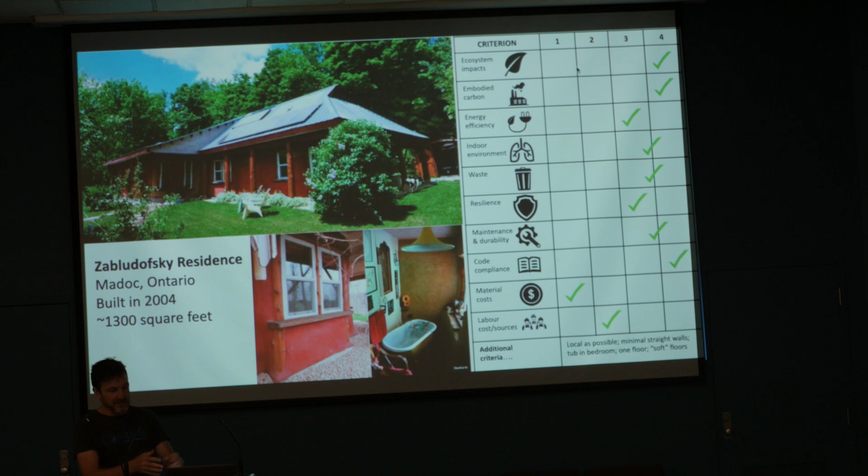And didn't want to have to use a walker, so wanted something that gave under her feet. So those are things that are very hard to capture in these criteria, but those in addition to these things here are sort of what shaped the building.

So on the resilience side, she really wanted to be very independent, so it's an off-grid building, and it has a wood stove as the main source of heat. Solar hot water is the main source of domestic hot water. She's got a propane generator backup for times when the solar isn't functional. So she really wanted to be quite resilient. She's got her own well and water pump and sort of water reservoir system. So all of that was really tied to the resilience piece.

The local materials, the non-straight walls, the springy floors, all of those things kind of got brought together. So we did straw bale walls for the house because they are the easiest thing I've ever come across to make non-linear shapes. They bend easily, they carve easily, so it's very easy to make non-straight walls.

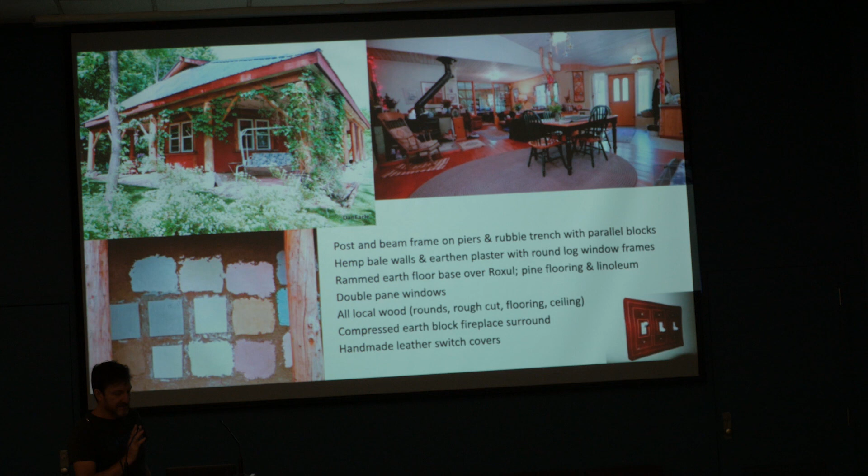However, her budget was really low, and while non-straight walls are pretty easy to make, non-straight roofs are very expensive. So that guided the way we designed the building. It's got a post and beam frame that holds up basically a pavilion roof. In fact, it just looked like a picnic pavilion when we built it. So you can see there's a whole post and beam frame that is very rectilinear. The roof is that rectangle shape, and then we were able to build the straw bale walls up to the bottom of those roof rafters in whatever shape we wanted, so that a very square roof contained a very non-square set of walls.

Did the straw bales go directly on the rubble trench? They were lifted up by one course of a type of block called Durisol block, which is like a wood chip-in cement form block. And how deep was the rubble trench? It was 4.5 feet, which is our frost line up there.

So to get her the soft floor, we knew we wanted to use a fairly thin, like a 3/4 inch pine floor. And it's over top of a rammed earth floor base. So we basically insulated, did about 6 inches of rammed earth, and then ran 2x4 runners on top of that rammed earth, and then put these fairly thin pine boards across it.

And the runners are on 4-foot centers, so the floor noticeably goes up and down. But she loves it, and it's surprising, people really like it when they walk on it. We didn't do that in the kitchen. We actually used a bit of plywood as a subfloor there because under your counters and under your stove, it's not so great every time you step. The stove dips.

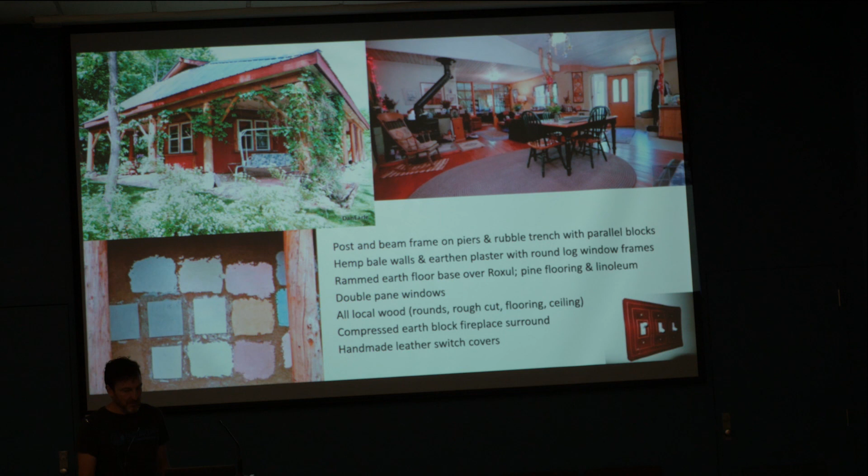So yeah, in the local materials we used lots of local wood, lots of the straw was local, the plasters were local, but she took it further — the light switch covers were made by a local leather maker rather than using pre-made plastic ones. So all kinds of ways that you can meet these requirements.

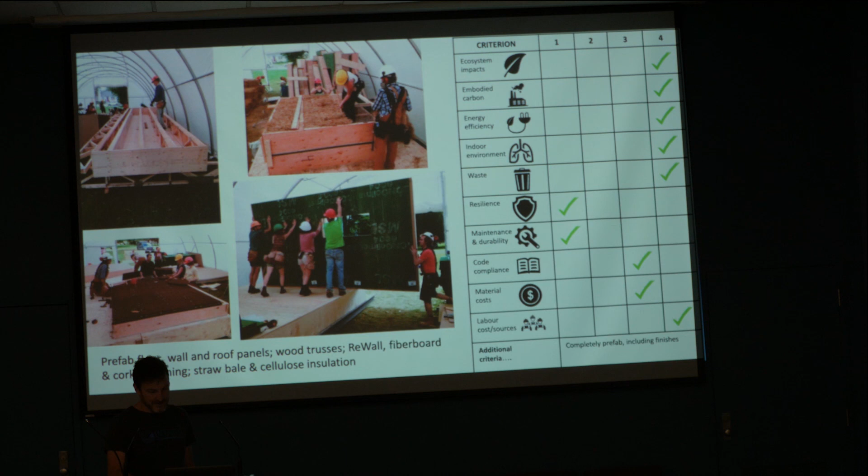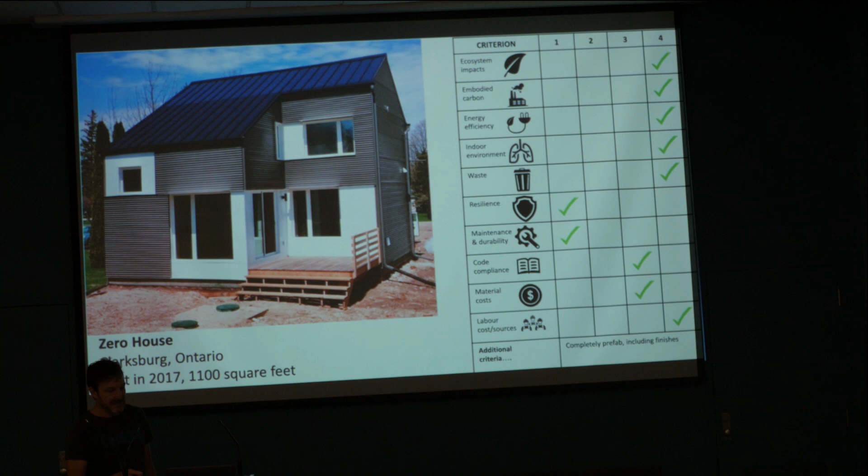And then I'm going to skip through, even though there's a bunch of cool buildings. I thought that this one, which I think I showed a slide of earlier, is interesting because it has, with the exception of resilience and maintenance, almost the same criteria matrix as the previous house, but there's absolutely no resemblance to it in terms of how it looks and what it's made out of. And I think that's where you see what playing with a few of these criteria does — suddenly the selection really changes.

So when maintenance and durability changed — this building was supposed to be completely no-maintenance, the owner doesn't have to do anything — we switched from this homemade clay plaster to prefabricated metal siding, and we still met the same ecosystem impacts and embodied carbon criteria, but switching up whether or not the owner had to do anything to maintain the building, suddenly the appearance really changes.

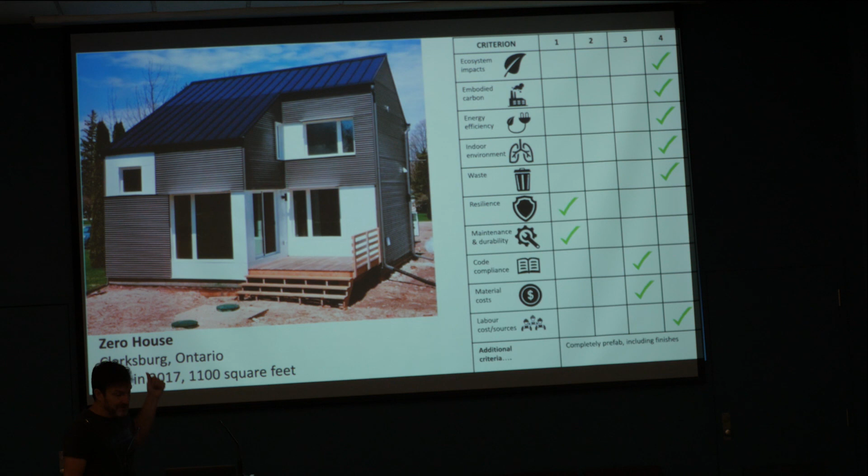And because the resiliency went down, this is a solar building. It's got these interesting PV panels — if you look, the top of the roof is a slightly different black color than the bottom of the roof. We put these adhesive solar panels on, so there's no glass, no frames, no mounting. It's just like big solar decals. But it's grid tied, so there's no batteries in the building. The resilience side meant that we also switched to an air source heat pump rather than a wood stove.

So just that flipping of criteria, a whole different set of materials and systems sort of present themselves, and that's a big part of why this really helps guide us, because it kind of takes all the choice out of choosing.